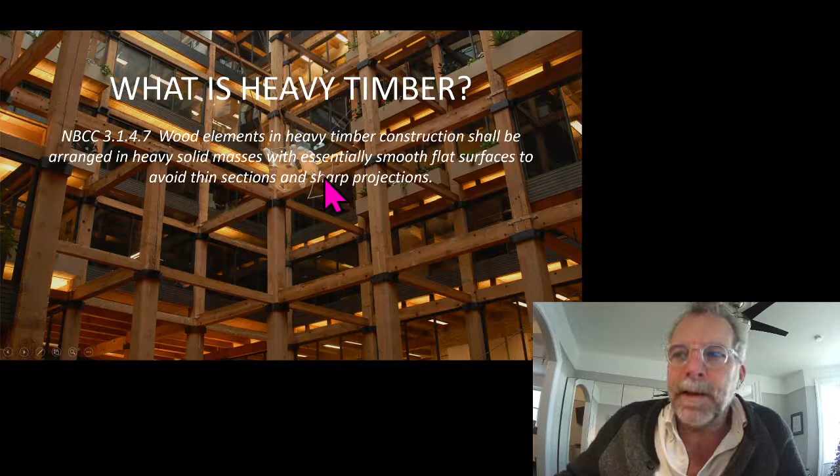This is the characteristic of heavy timber that makes it more fire safe, and we'll talk about fire safety a little bit more later. The explicit definition: columns have to be a minimum of 140 millimeters, beams a minimum of 89 millimeters, floor decks minimum 64, roof decks 38. If you meet these minimum dimensional requirements, you're deemed to have a 45-minute fire rating by default.

So, as you know, what that means is that the building will maintain its structural integrity for 45 minutes after the onset of a fire, which allows the occupants a chance to exit the building.

So what is mass timber then? Well, mass timber has no definition in the National Building Code. It is essentially a building system comprising larger engineered elements manufactured by assembling smaller pieces of sawn or peeled wood using adhesives or mechanical fasteners.

Fire resistance of mass timber elements is calculated in accordance with NBCC Appendix D. Essentially what that does is allow you to calculate the burn rate of the wood, estimate the remaining core after your fire duration, and evaluate the structural capacity at the end of your design fire.

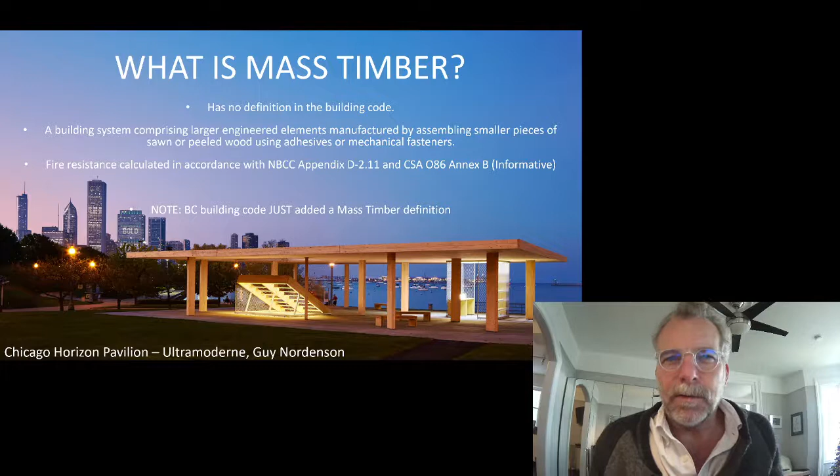BC Building Code did just add a mass timber definition. The mass timber definition is essentially the same as the heavy timber definition, except that the sizes are rounded to suit dimensions of standard glulam, CLT, and NLT panels. But otherwise, it's a very similar definition to heavy timber.

So let's look at some of the drawbacks of using wood, or some of the perceived drawbacks. Fire is the number one. People perceive that because wood is combustible, it's therefore not fire safe, and it's simply an erroneous presumption. Anybody who's tried to build a campfire, or even a fire in a fireplace, knows that fire will not sustain combustion in the absence of a re-radiating surface.

That's a wonderful quote by my pal Steve Craft from CHM Fire. Essentially what that means is if you have a log on its own, you cannot light that thing on fire. The only way you can get it to catch is to put two logs side by side so there's a gap, it'll catch fire in the gap, or put it adjacent to the back of your fireplace, it'll catch fire in a gap, something. But it needs a re-radiating surface to sustain combustion.

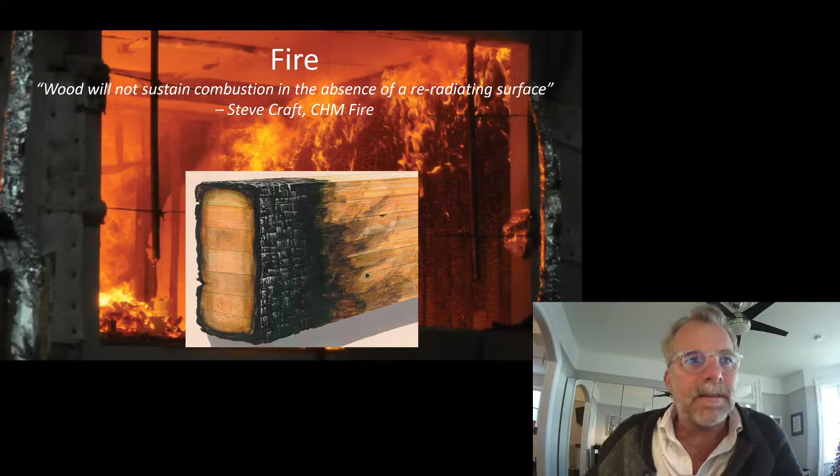And this is a wonderful picture - this is from, I think, the Great San Francisco Fire at the turn of the 20th century, post-earthquake. What we can see is that the steel elements have failed.

They turn to spaghetti in the presence of heat, with a dramatic loss of strength and stiffness. The wood element certainly charred, but that solid core was left in the middle, so the wood element stayed intact and is supporting the failed steel elements.

All of the loss of life was related to fire code violations. There was a fire escape on the side of the building that collapsed, and there were doors that were barred to prevent people from leaving and taking breaks. But the structure did exactly what the structure was supposed to do.

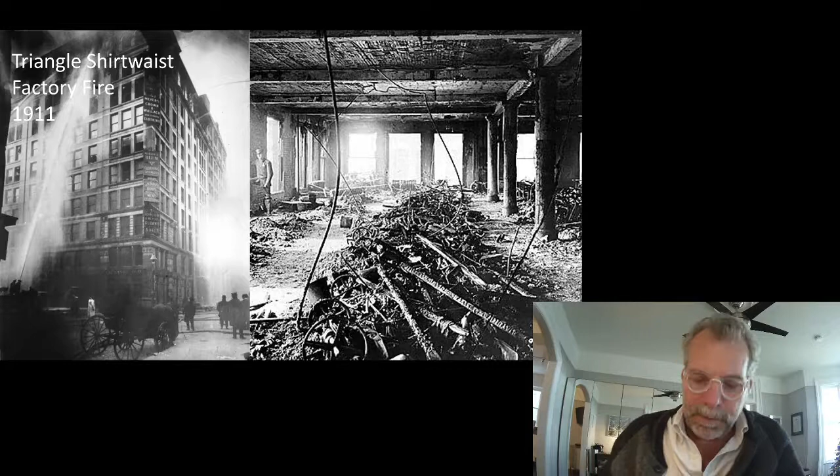So here's a mass timber building that is completely intact following the fire. We know that mass timber and heavy timber are fire safe.

So why does wood have a bad rep? Light wood framing is not fire safe. With light wood framing you have thin elements relatively closely spaced, creating re-radiating cavities between joists and within stud walls - really the worst possible situation for fire. That's why light wood framing is suitable for single family homes, because you're never far from an exit in most single family homes.

For multi-story buildings up to six stories, the fire protection requirements are stringent - mandatory sprinklers, multiple layers of drywall to provide insulation to the wood. So light wood frame needs to be fire protected, but mass timber doesn't necessarily.

Another major concern people have about building with wood is water. To be sure, wood is vulnerable to decay in the presence of water, but it's not vulnerable to decay if it's taken care of properly.

So decay requires liquid water. This graph shows that fungal growth happens when the moisture content of the wood exceeds about 25%.

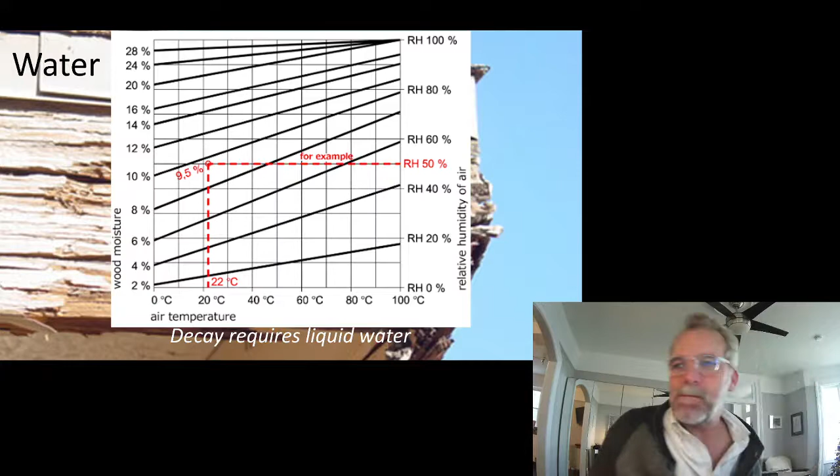What about cost? Anecdotally, wood structures are generally considered to be about 15% more expensive than the comparable steel or concrete structure. But of course there is a gigantic range. Many of the precedent projects we're going to see, the wood structure is twice as much as the comparable steel or concrete structure, simply because the choice of using wood was made for aesthetic reasons, and the wood structures were designed explicitly to be expressed, compared to a kind of meat and potato steel or concrete structure.

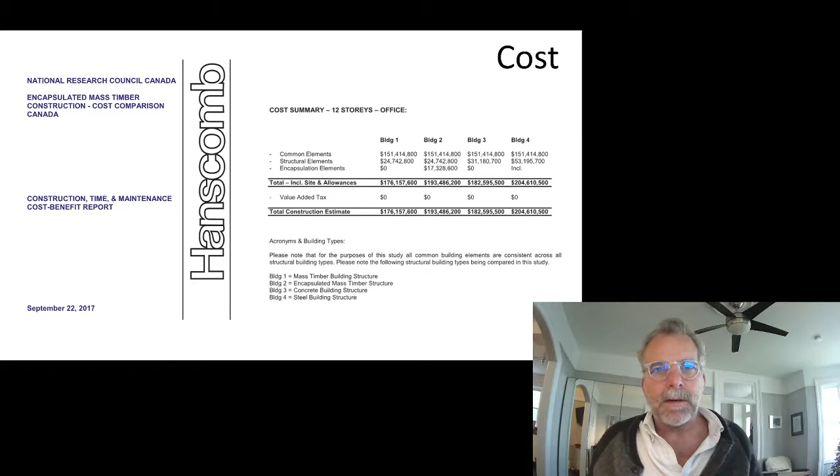If we look at this NRC report, commissioned by the National Research Council, we see a different story. This was a 12-story office building. It was designed in 4 different ways: as mass timber, encapsulated mass timber, which means covered in drywall for fire protection, concrete, and steel. What we can see is that the mass timber structure is actually the least expensive of the 4 alternatives, because the mass timber structure in this study was optimized.

Now, the mass timber structure in this study probably had a 6 meter by 6 meter span, for example, because that's optimal for mass timber. It's not optimal for a 12-story office building. So it can be very economical if it's used in its optimal way. Anecdotally, as I say, generally it's considered to be about 15% more expensive than concrete or steel buildings. That is 15% more expensive on 20% of the building, so about a 3% premium on the building cost.

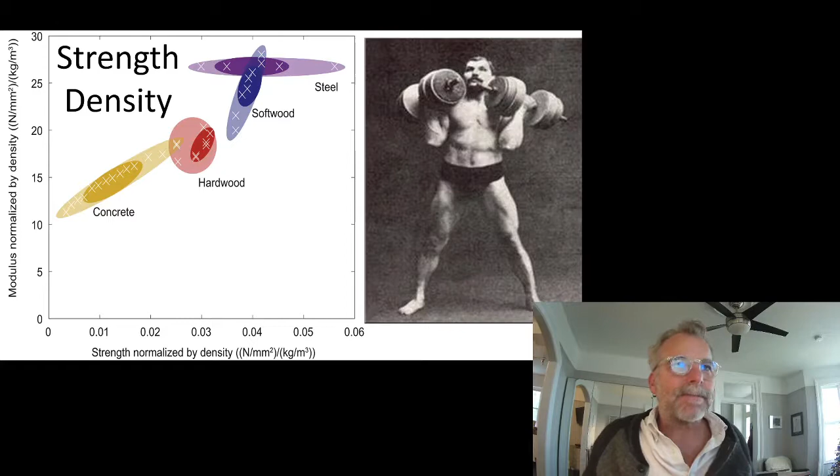So let's think about building codes. The building code currently allows light wood frame buildings up to 6 stories, which was a big change in the 2015 building code. So 6 stories is a limit, and it makes no exceptions for mass timber.

And yet we've got projects like this underway. 77 Wade, a 100,000 square foot, 8-story office building, has approvals in place. U of T Tower is a 14-story office building, which has just received the planning approval. We don't have a building permit, but we have approval.

So to move to the next stage, the way these buildings get their approval is through an alternative solution. The building code has prescriptive measures that say you can build this type of building this big, but there's a provision for alternative solutions that says if you can demonstrate that you meet all the intent of the prescriptive measures, you are not bound by them. These projects have gone through an alternative solution process to demonstrate that they are at least equal to the building that would have been prescriptively allowed, primarily in terms of fire safety, but also durability and structure. So we're not really limited by the building code. It provides limits, but it also provides an out.

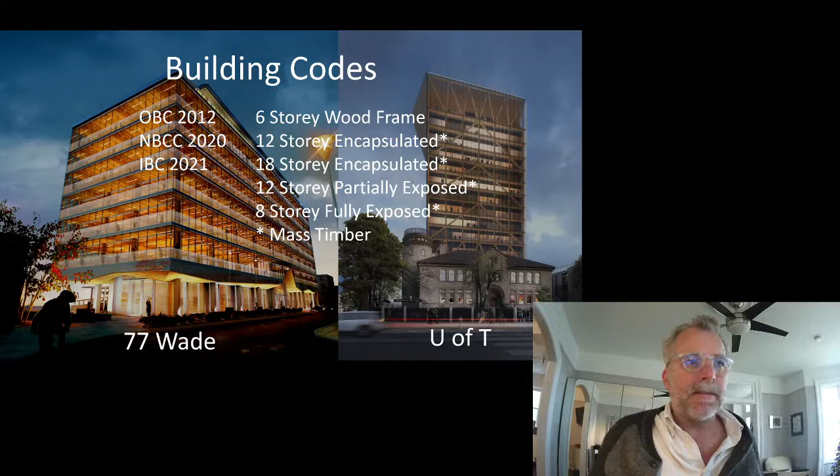So, are there any benefits? We know the perceived drawbacks of building with wood are generally not that valid, but are there benefits to building with wood? The major benefit to building with wood, of course, is sustainability.

Whereas building with concrete and steel results in a great deal of new CO2 in the atmosphere, building with wood actually encapsulates CO2. It's carbon negative for the structure.

The approximate rule of thumb is that 1 cubic meter of mass timber or wood used in construction encapsulates as much carbon as is contained in 1 ton of CO2. This was always a very confusing statistic for me, because 1 cubic meter of wood doesn't weigh 1 ton, so how can it encapsulate 1 ton of carbon?

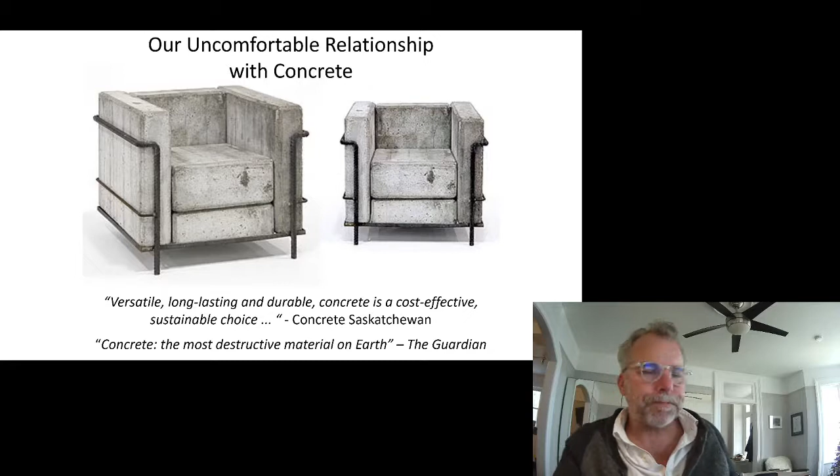Modest amounts of concrete are not going to hurt anybody in construction. The trouble with concrete is that it is the best construction material. It's fire safe. It's massive. It's rigid, so we don't have vibration problems. It provides a good acoustic barrier. It's very flexible and versatile, and for all those reasons, it is utterly ubiquitous.

And we build so much in concrete, and that's really the problem. It's not that there is anything explicitly wrong with concrete. It's just that when you're building so much concrete continuously, it becomes a problem. So what are the problems with concrete? Well, one is obviously CO2. The concrete industry is responsible for something like 8% of total global CO2 emissions worldwide, so it's just a gigantic contributor to greenhouse gases.

The production of cement is an extremely energy intensive process. Backing up a little bit, concrete consists of gravel, sand, water, and cement. The cement is the binder, so it's a critical part of the concrete—you can't have concrete without cement. Cement is extremely energy intensive to produce; it requires an awful lot of heat, and that's what makes concrete such a terrible contributor to greenhouse gases.

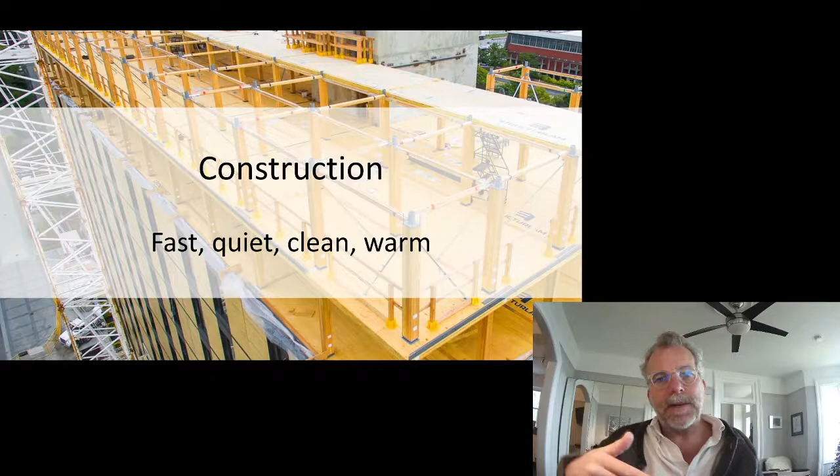I was just listening to something utterly counterintuitive: in the desert, outside shaded areas, the ground temperature is colder than the air temperature overnight. That's because, in addition to being cooled by the air, the ground is radiating heat which is lost into space. Under a tree, it's equal to the air temperature because the heat is being re-radiated back.

Wood structures are associated with wellness. There have been studies demonstrating that in wood buildings there's increased productivity, reduced absenteeism, and happier people. To be sure, these studies may have had an agenda, and it's unlikely the findings were actually false, but someone found what they went looking for. Still, they're not incorrect.

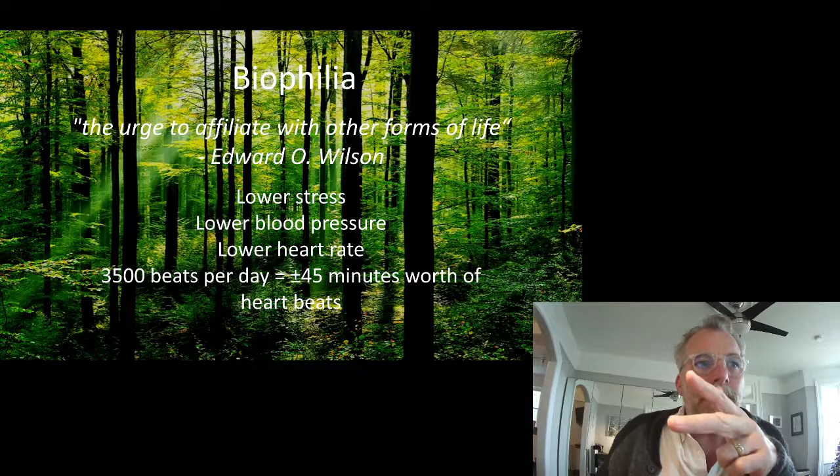Biophilia is the urge to affiliate with other forms of life, and this is the effect we're seeing in people working in wood buildings. Studies have shown lower stress, lower blood pressure, lower heart rate. People in wood buildings have been found to have their heart beat 3,500 fewer times per day—45 minutes worth of heartbeats saved working in a wood building. The presence of wood suppresses the sympathetic nervous system, the fight-or-flight system, and reduces cortisol levels in the blood. So generally, people prefer being in wood buildings.

Wood is a hygric mass—hygric being the ability to absorb and re-radiate water. We can call this the humidity flywheel effect: wood absorbs and releases moisture to maintain the indoor environment within an optimal range when exposed on the inside. This is one reason wood is so good in a wet environment. Say you get some condensation in the ceiling of your pool—wood has the ability for local moisture to absorb that moisture and distribute it within the wood through the capillary cells, so the moisture content stays below 25%, except very locally, even in the presence of some liquid water. Wood is effective at helping maintain the indoor environment through this humidity flywheel effect.

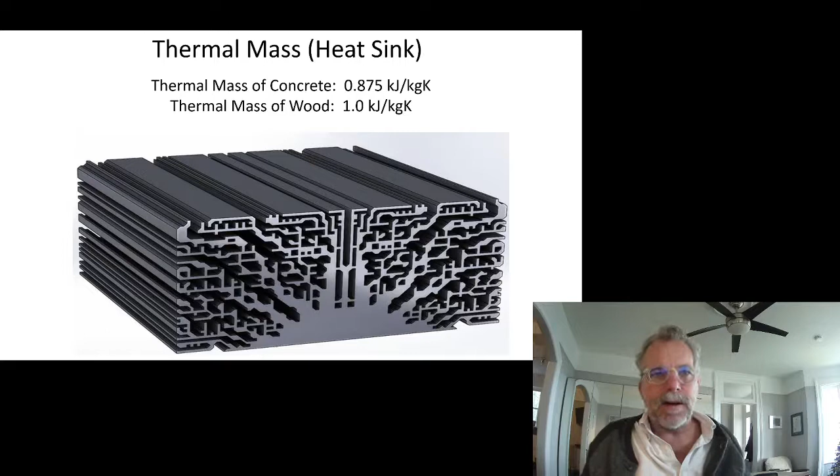The second reason is that wood is much less conductive, meaning the stored thermal energy isn't accessible as quickly. If a concrete floor cools overnight, the next day the floor cools the environment, or conversely, if it warms up in the sun during the day, you have access to that heat that night as the concrete re-radiates it. Wood, being less thermally conductive, doesn't give you access to heat in the same way, but for a long-term flattening of the temperature curve, wood is effective. In mass timber, notwithstanding that it's much lighter than concrete, there is quite a bit of thermal mass—a 10-inch mass timber panel would have the thermal mass of a 3-inch concrete topping, so not insignificant.

What about money? Commercial landlords have recorded higher rents, better tenants, and shorter vacancy periods in their wood buildings.

What constraints do we have to keep in mind? Well, vibration and acoustics. Steve Titus gave me this quote: wood benefits from the effects of psychoacoustic perception, meaning that because we associate wood with a warm environment, we assume it will acoustically perform well. It doesn't. Wood is actually slightly more reflective than concrete. Here's our noise reduction coefficient for wood, and here's the noise reduction coefficient for unpainted concrete. So wood is not acoustically absorptive.

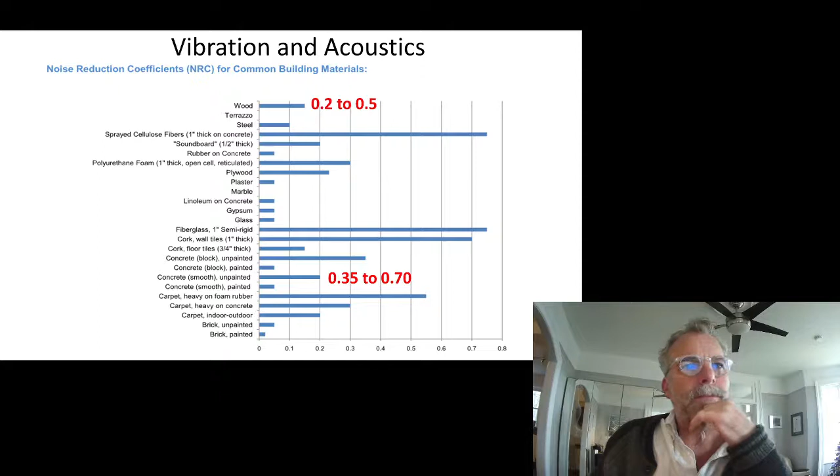It is reflective, and in fact, one of the major barriers to exposing wood in mass timber buildings is exactly that. We need absorptive surfaces, so we wind up covering a lot of the wood with acoustically absorbent panels. We can mitigate the sound reflection, but we do it by adding something - we can add something made of wood to be in kind with the structure, but we are covering up the structure with a mitigating panel.

Sound transmission is a function of weight, and one of the great benefits of building with wood is that it's lightweight. One of the great drawbacks is also that it's lightweight. Because it's lightweight, it doesn't mitigate sound transmission in the same way, and when it doesn't do it adequately, we generally pour concrete toppings on top of wood floors simply to add mass to manage sound transmission.

Shrinkage is a problem with wood. Wood is a natural material, and trees require water to grow - they are full of water. When they're harvested, they first dry and lose 50% of their mass, which is just loose water within the wood, and then they'll further lose 25% of their mass, which is water stored in the cell walls. That's the process of curing. When we lose the mass and lose the water, we shrink.

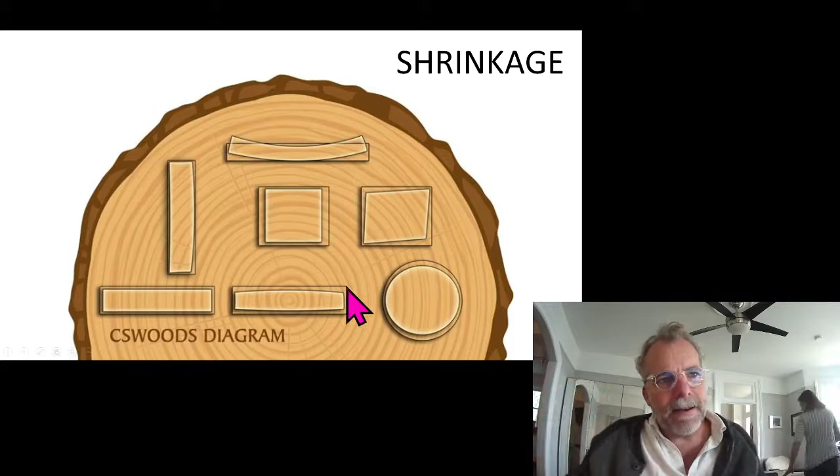It causes it to cup. On this surface, the grain was more dominated by the annular orientation relative to this surface, which is more dominated by the radial, and therefore it cups. So we get cupping and twisting and this kind of bulging effect, just depending on where we cut the piece of wood from the tree.

The amount that wood shrinks is a building movement. All buildings move, and the shrinkage in wood is comparable to other kinds of building movements. To put it in perspective, concrete, when it shrinks due to curing, also shrinks about 0.1% - similar to the amount wood shrinks parallel to grain. That's why we wind up with cracks in our concrete.

A steel beam, midspan, spanning L over 360, will deflect around 20 millimeters - that's the equivalent of shrinkage over 3 floors of a wood building or so. So we're used to dealing with movements of that magnitude, and the solutions are similar: providing slip joints, expansion joints, and other types of things.

Another consideration with wood framing, mass timber framing, is beam shadows. In a concrete building - the kind of prototypical concrete building we're seeing in Toronto these days - you have a raised floor, services under the floor, exposed concrete ceiling, flat slab with drop panels. The innovative slab developed by Dermot Sweeny has tapered drop panels, and all of these things allow maximum light penetration - there aren't a lot of features on the underside of the ceiling to impede the penetration of light.

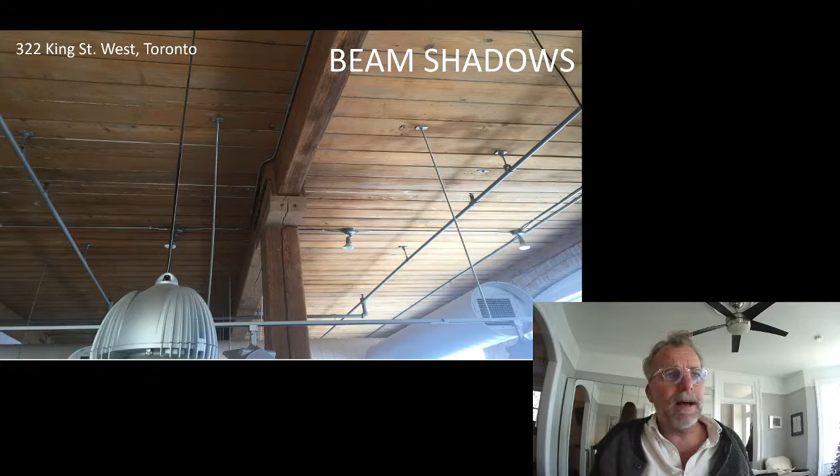As soon as we start building with beams, we start introducing beam shadows. This image is from KPMB's old offices on King Street - we were involved in a competition with them for a mass timber building, talking about structural systems, and we just looked up and saw dramatically less light on the second bay than the first bay, getting darker the farther you get from the window. We've got to be sensitive to beam shadows in wood buildings in a way that we don't in concrete buildings, because they're flat slabs, and in steel buildings, because we have ceilings - we don't expose steel in multi-story buildings since it needs fire protection.

And this, of course, is what we would all like to see. This is the Villa Mairea by Alvar Aalto. Incredibly, this is not a mass timber ceiling - it's just a wood ceiling. But without the beams, the light penetration is amazing.

So, we're hearing a lot about it these days. Is it new? Well, of course it's not. We've been building with mass timber or heavy timber for centuries.

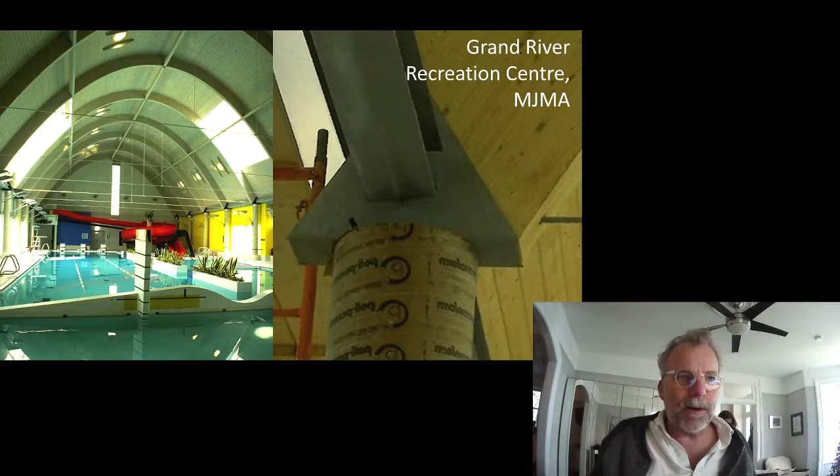This is the Google offices in Waterloo by Robertson Simmons Architects, repurposing an existing heavy timber building. Blackwell's been doing it for a long time. The Grand River Recreation Center by MacLennan Jaunkalns Miller, it was just McLennan Architects at the time, would have been the late 80s, with glue lam arch and heavy timber deck.

Milton Leisure Center is another example from the early 90s, again McLennan Architects, which was glue lam beams and purlins and a heavy timber deck.

Jackson Triggs Winery by KPMB. This was another late 90s project that I think stands up today. If this would be celebrated today, 20 years later, as an architectural achievement.

Cawthra Community Center, Diamond Schmitt. This was another one of our projects.

Bird Studies Canada headquarters, I love this project. I don't have nearly enough photos of it, and I've got to do something about that, to the point where you can see that this photo was scanned out of a physical magazine. I love this because this was done by Montgomery Sisam in early 2000 or maybe the late 90s. But it's an archetypal building now, a steel frame with heavy timber deck.

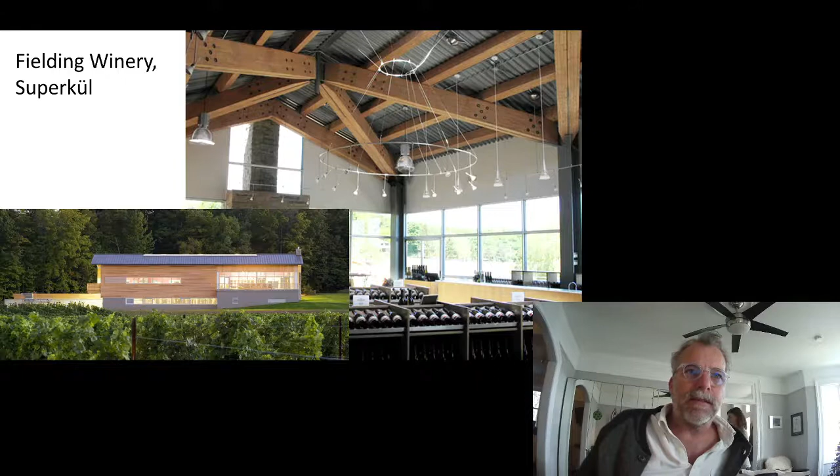Another nice little interesting radial project with Phil Carter. In Lakefield College School, Diamond Schmitt.

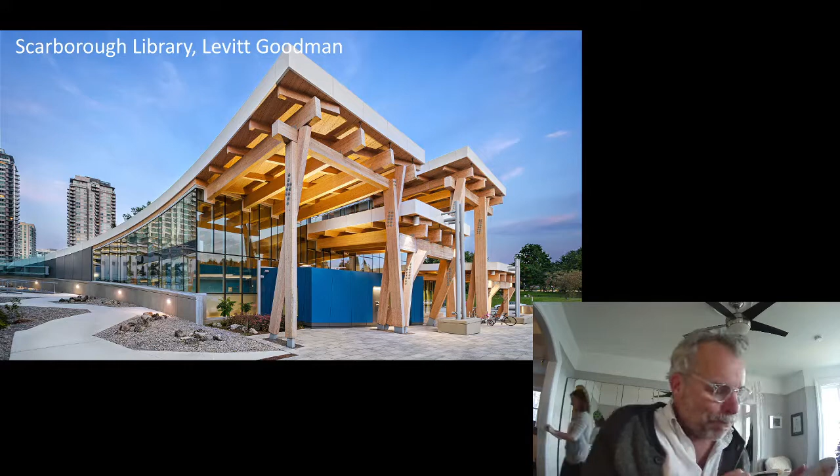And then for the volume of fiber award, we go to the Scarborough Library. How much wood could we squeeze into one project? Extraordinary project - a lot of wood.

CFB Borden dining facility. This is worth talking about because it really gives you a sense of the range of form that's possible in wood.

In steel, it's difficult to build an arch - you've got to curve big steel members, it takes extremely heavy equipment, or you've got to cut things out of plate. It's a real challenge. In concrete, building complicated forms is expensive. In wood, you don't get a curved glue lam for free, but generally it's about the same process as making a straight glue lam beam. So it's not a gigantic burden to make a curved glue lam.

A lovely little project with C.Y. Lee. The really interesting thing about this one is the pre-stressed tensile roof and the fact that it was taken out of a single plane and made into a space-occupying truss over multiple bays.

And then my partner Christian really took it to another level of refinement with the Redstone Winery. This is CLT panels with a king post.

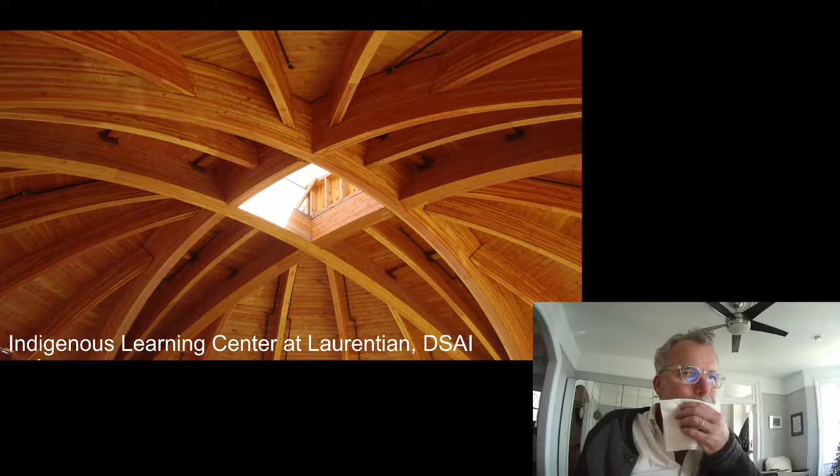My partner Ian, Indigenous Learning Center at Laurentian University, with Diamond Schmitt Architects. And my partner in Corey's project, the Iroquois Longhouse with Brook McIlroy.

And another one of Christian's projects is the Ontario Place Waterfront Park. In this case, we can see the CLT panels used almost vertical like beams, as well as acting as a deck.

One of our first multi-story buildings is St. Jacob's Farmers Market in Waterloo. So multi-story, glue lam, CLT floors.

And this is one of my favorites - the Nike Crystal Coliseum. This was a building built only for a weekend, I think, during the Toronto Marathon, several years ago. It's a floating building on a barge - glue lam structure with fabric roof. We designed the glue lam and the fabric. It was so effective because the fabric is translucent, so it acted as a beacon at night with the lights glowing through, but also reduced the daylighting requirements. This was possible because there needn't be an envelope - it was a temporary building, so it didn't need any insulation at all.

A wonderful thing about this as a system is that if water gets through that membrane, you see it, and it dries up. It's not like so many of the wood systems - if you have a multi-layer assembly, water gets in there, you don't even know you have a leak, and that's the thing that accelerates the deterioration of a building. But if you just have a single layer, water comes through and drips on the floor - you put a bucket under it, and then you go fix it.

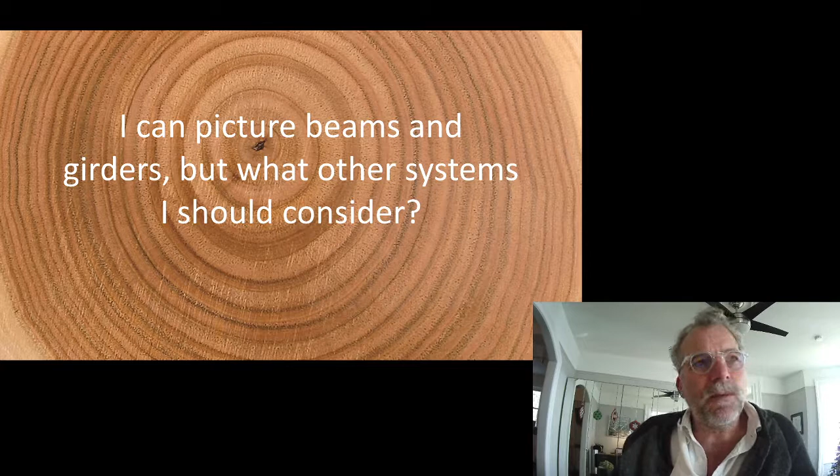So what other things can we do? We've got beams and girders as the obvious thing. Let's look at some of the systems.

These images I developed for an article that I wrote for Canadian Architect earlier this year called the Mass Timber Primer, and these images have been popping up everywhere - the number of ways to build.

This is kind of the simplest default: long beam, short deck. So if you have an asymmetric bay, orient your beam in the long direction, your deck in the short direction. This is not what we would do if we were designing Walmart, for example. In a Walmart, we would orient the heavily loaded elements in the short direction and the lightly loaded elements in the long direction - naturally, if you don't have as much load, it's easier to span farther.

But as I mentioned, in wood the cost of the fiber dominates the cost of the system, and the deck is the bulk of the fiber, so we want to minimize the deck span. Gary Williams, who owns Timber System, once told me that the system with the most economical deck is the most economical system. So we orient the beam in the long direction because the beam has depth and can be efficient, and we orient the deck in the short direction because that minimizes the amount of fiber in the system.

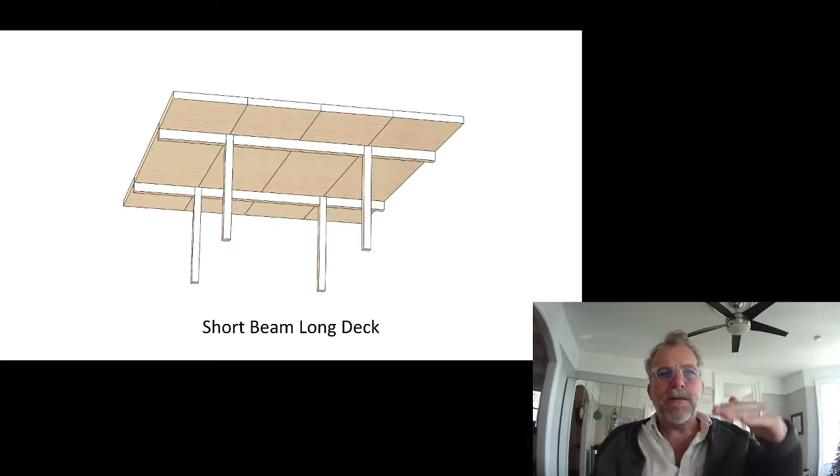Alternative: short beam, long deck—just the opposite of what I was saying. Why would we ever do this, having just told you the other is best? We'd do this if depth of floor was important to us. We'd have a thicker deck, maybe 50 millimeters thicker, but we might save 200 millimeters in the depth of our beam. In commercial development, especially in an urban context, floor-to-floor heights are critical, and squeezing a few inches out of the floor-to-floor height is important.

So we might orient the deck in the long direction.

Beams and girders: if the system with the thinnest deck is the most economical, we want to choose the thinnest deck that meets our basic criteria, probably based on fire rating, and span it as far as we can. As soon as we hit the span limit, we put a beam, and another, and another. We don't want columns at that short spacing, so we end up introducing girders. In this example, the deck is as thin as it can be, on beams spaced just close enough to accommodate its maximum span, and a girder negotiates between the beam spacing and the column spacing.

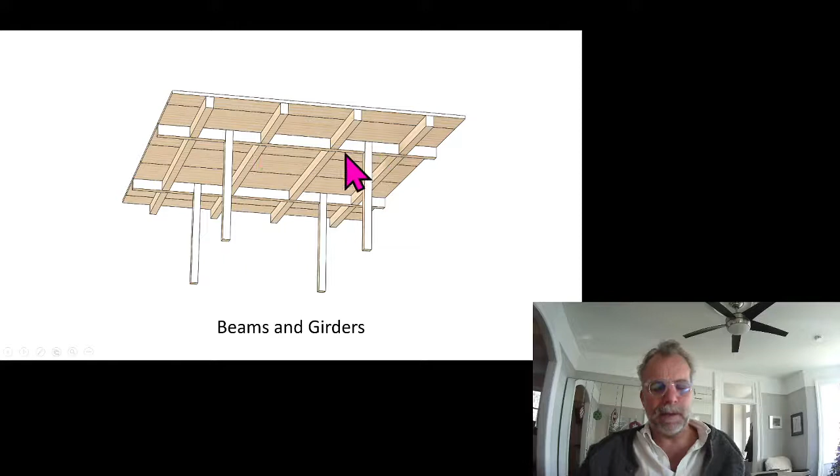A two-way beam system. One thing you might have noticed in the previous system—the beam and girder system—is that there's a hierarchy: deck, beam, girder, which imposes an orientation on the space. There's a hierarchy of views and circulation, and it impacts mechanical distribution, all of which may be fine, or may not. It's also optimal for asymmetric bays—we'd naturally want one bay shorter than the other. Most wood systems are optimal with an asymmetric bay, something like 1 to 1.5.

So what if we want our space to be more democratic than that? We don't want to introduce a hierarchy, and we want column spacing the same in both directions—not a 5x7 grid, but a 6x6 grid. Well, one choice we have is to do a two-way beam system.

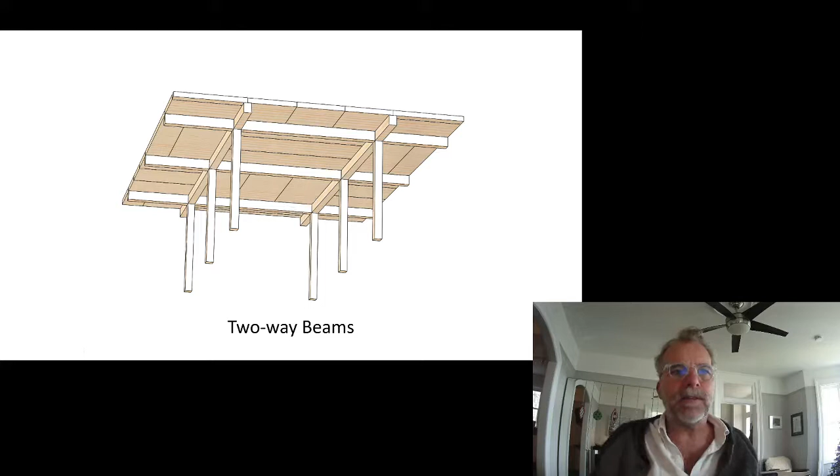In order to benefit from two-way beams, we need to load beams in both directions. So we might flip the deck and orient it in different directions, in a parquet flooring or basket weave style. What that does is give this beam exactly the same amount of load as that beam, so all our beams are the same size.

Another example is a two-way point-supported CLT system—the scheme used for Brock Commons, the 18-story student residence at UBC. Tremendously innovative: you can see there are no beams. Having a system with no beams is hugely beneficial from a floor-to-floor height point of view, a mechanical distribution point of view, and a penetration of natural light point of view. So huge benefits to point-supported CLT.

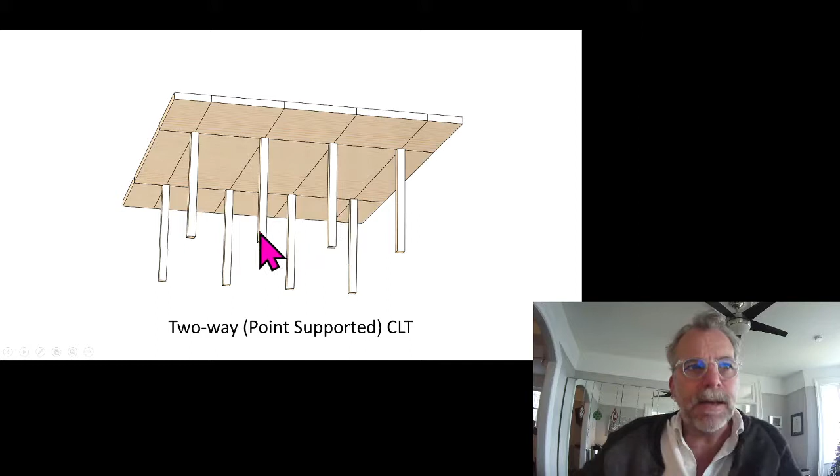However, CLT is only made in 2.4 to 3 meter widths, and if your panel is limited to that, it becomes the spacing of your column. So you get very, very tight column spacing in point-supported CLT buildings, which lends itself well to projects like student residences or hotels, where you've got closely spaced demising walls anyway—but it's not an appropriate system for an open concept commercial office building.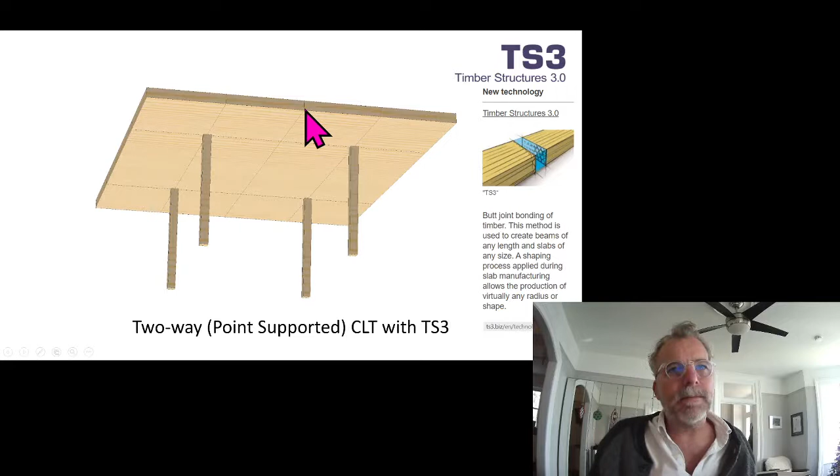I'm going to be preparing a lecture shortly on shallow floor systems, simply because for commercial development it's so important.

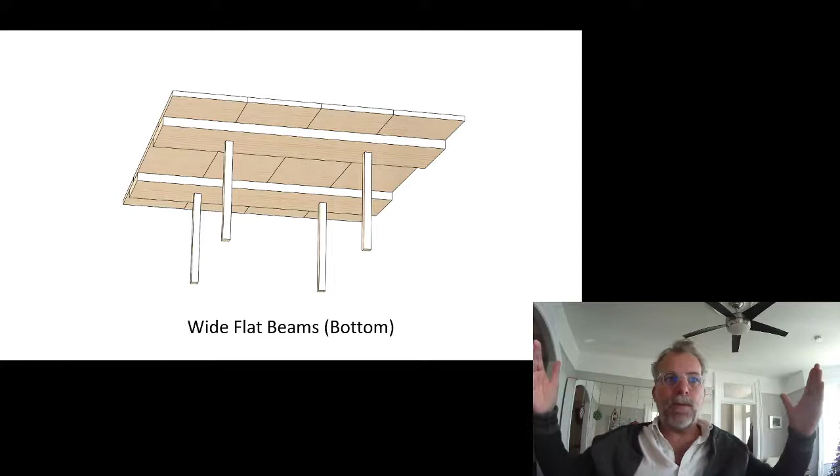This would be one of the shallow floor systems I talk about, wide flat beams. We know that deeper is cheaper is the adage in structures. An efficient beam in bending is narrow and deep. The reason we'd do a wide flat beam is simply to make it shallower. If we make it shallower, we have to make it wider. Using CLT, we can make very wide beams, so we can use wide flat beams to develop a shallow system.

Look at the way it's detailed up here. We can see that the panel goes all the way to the midspan of the beam. If you have a beam that is as wide as a third of your column to column span, that doesn't mean your deck can be shorter, because if you start loading the edge of your beam, it's like a teeter-totter. So the deck needs to come over and bear its load right along the center line of that beam, so that the beam doesn't topple.

So you don't save anything in deck with a wide flat beam, but it does make the beam shallower, and that's good. The other thing is it reduces the exposed surface.

In a wide flat beam, you expose the bottom and the two sides to fire, whereas a deep beam, you expose the two vertical sides and the bottom. The deep beam will be much more affected by fire than the shallow beam. So what we want to do is minimize the amount of surface, and a wide flat beam will do that. Our fire load case is likely to be better in a wide flat beam situation.

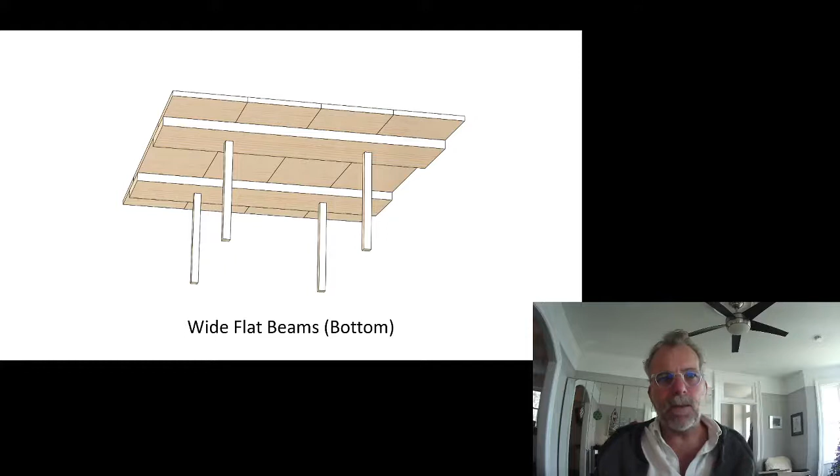Another one that we have not done, but we were advocating for a project, and we will do it eventually, is wide flat beams on top. The deck is unaffected - it has to span to the middle of the beam regardless, one way or the other. But if we put the wide flat beam on top, it means we have a featureless soffit, and that's beneficial for the reasons I was talking about before - for mechanical distribution, for space planning, for light penetration. There's a number of reasons why that's better. It does mean you have to build up your floor, but in a lot of projects you would build up your floor anyway.

So what about wide flat beams flush? Well, I already told you that if you load the edge of your beam, then your beam is vulnerable to toppling. So if you want to do wide flat beams flush, what you need to do is use a wide column. Your column has to be nearly as wide as the beam itself, so that when the deck loads the edge of the beam, it doesn't make the beam simply topple over. That's not to say that it's not a good system.

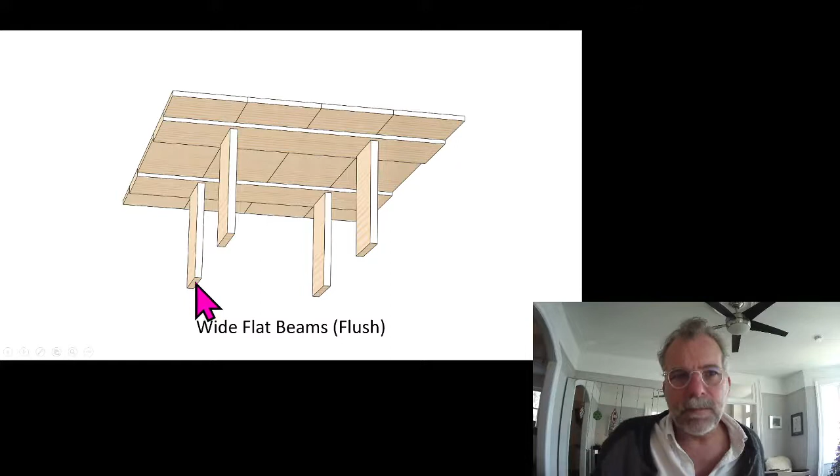A similar system is what's being done for George Brown College, the Arbor, with our good pals Fast and Epp from Vancouver. Very, very clever structure. But these long columns - they had to make a concession to the columns in order to get it to work.

There are a number of double beam systems around. Double beam systems are really interesting for a number of reasons. One is that in glulam, you're limited to about 365 millimeters in width, so you're going to run out of size if you start getting into large beams - you just run out of available size. And so having two beams, you get twice the width, obviously.

The double beam allows the column to go up between them. So why is that important? Well, I told you that wood shrinks about 2% perpendicular to grain and 0.1% parallel to grain. If we have a 600 millimeter deep beam, that beam is going to shrink 12 millimeters as it seasons.

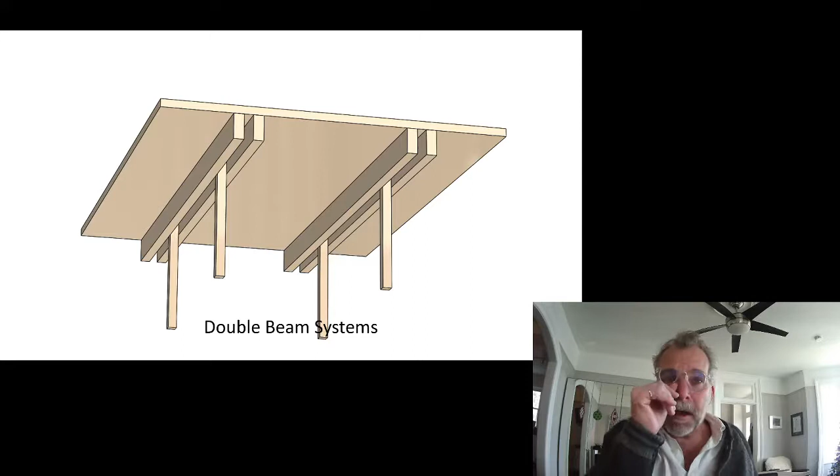Now, all of these things - if you buy glulam that's already seasoned, then most of that shrinkage has already happened, so maybe it's 6 millimeters instead of 12 millimeters. But regardless, the shrinkage is significant. If the column goes in between and supports the column above, now the floor-to-floor shrinkage is only the shrinkage parallel to the grain of that column. If you stack it or platform frame it, then the floor-to-floor shrinkage is the shrinkage of the beam plus the shrinkage of the column, and that adds up over multiple stories of building. So there's a real benefit to having the column sneak up between and having a beam held off on either side with a hanger.

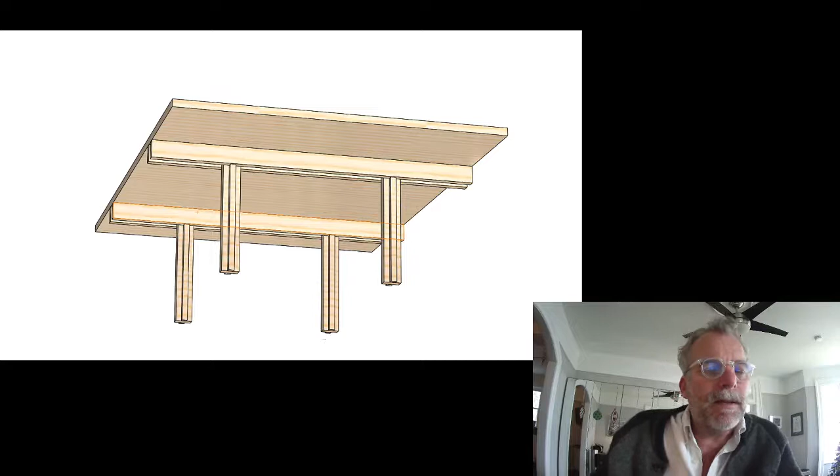This is a really interesting concept for the Trinity residence which we're working on right now with Mecanoo. This is cruciform columns with a double beam. The cruciform is seen by some people as frivolous and is probably being value engineered out. But the cruciform is essentially just a shoulder for the beam to sit on, to transfer load into the central beam or central column, and you can see the central one slips up in between. So it's a really clever way of building these columns, and I think it was probably short-sighted to think they could be value engineered out. I don't know that it's actually going to be a value add to take out the cruciform. I think they were really super clever.

Triple beam system. This was developed by my colleague Simon Raymond in my office for a project. It has a number of really interesting enhancements. In the triple beam system, the outer beams can run continuous past the column. The column is notched and runs up through in between the outer beams, and the inner beam is discontinuous at each column because the column has to slip up through to manage the shrinkage.

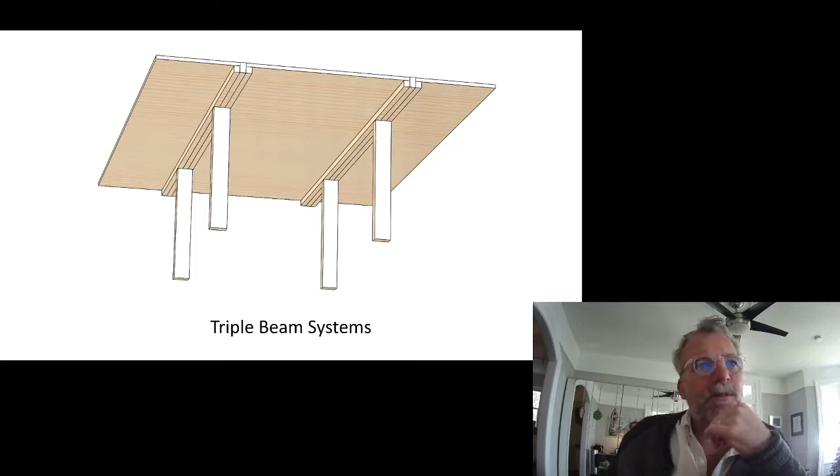The other advantage of this over a two-beam system is that we don't have a surface in between, so we've reduced the amount of unprotected surface from fire, which allows us to make the beam smaller as well. In this particular case, what Simon did is he made the central beam deeper since the outer beams can carry the deck, so he took advantage of a little bit of extra depth as well.

Staggered deck system. This was developed by Equilibrium with Michael Green for one of Michael's projects, and it's a really clever way of achieving long spans with thin decks. So you're essentially making like corrugated cardboard or corrugated roofing out of wood. You get the flexural benefit of the full double depth, whereas the volume of timber is essentially the volume of the single.

VCTC, or voided concrete timber composite. We were trying to get out of the habit of referring to this as bubble lam, because bubble lam automatically has a connection to bubble deck, and yet the voids don't have to be. So VCTC is a timber panel with a thick composite deck on top, comparable in thickness to the timber panel. So one might have a 250 millimeter timber panel with a 250 millimeter deck and 200 millimeter voiding balls.

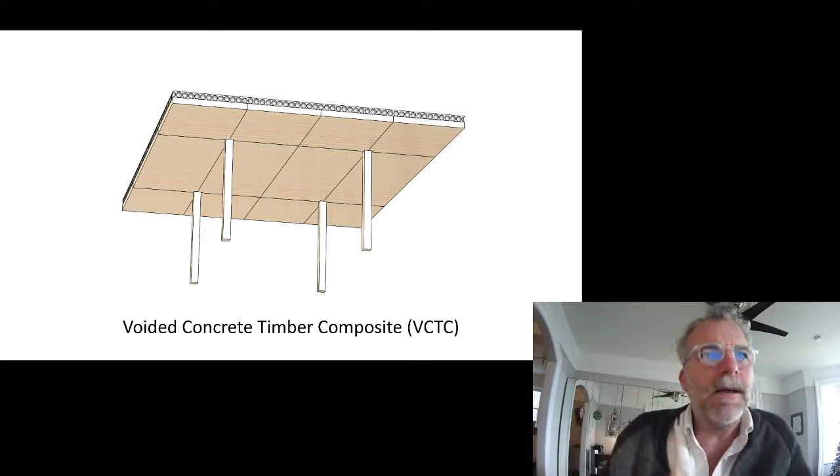The concrete allows the wood to span farther than the wood otherwise would have. The wood allows the concrete to span farther than it otherwise would have. So whether you look at it as an enhancement on a concrete system or an enhancement on a wood system, it doesn't matter. The two are better than either one of them from a span point of view.

From a loading point of view, we can tune the thickness of the topping to do whatever we need. In a traditional wood concrete composite, we would do thick wood, thin concrete topping would be optimal, and your capacity, your strength is limited by the strength of the wood. If we do something like this, we can say as soon as we hit 286 millimeters, we've run out of depth. We can't make a panel deeper than that reasonably, but we can have a 600 millimeter slab on top of that.

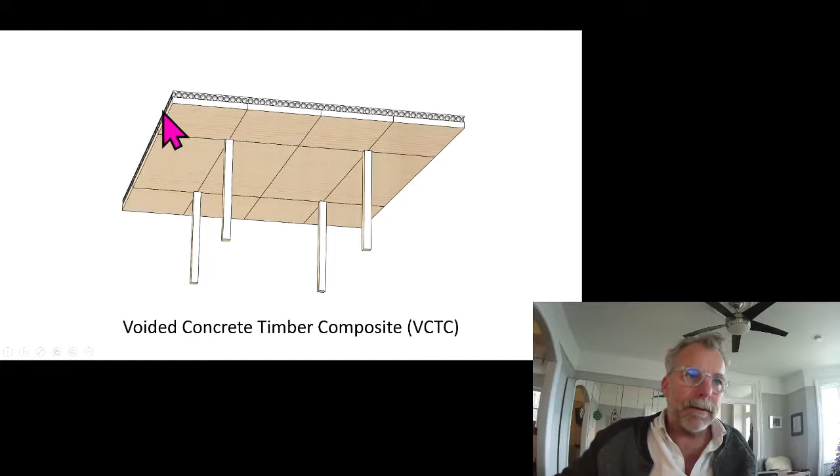What that does is allow us to do a featureless soffit. Now we've got a system that can approach the thickness of a concrete flat slab, so we can keep things much shallower. It minimizes the surface area—you can't get less surface area than a flat surface from a fire point of view, so it's very fire effective. We can achieve even greater fire effectiveness by putting extra bars in the slab, so in the event that the wood burns away completely, we maintain integrity in the concrete if need be.

The voiding balls are plastic balls, HDPE plastic, recycled plastic. They're there for two reasons. One is to displace concrete, because the less concrete, the less weight, the less cement, the less sand—so displacing concrete is a good thing. Also, it encapsulates problematic plastics into our building for a long duration, but that's just a secondary benefit. The system would work just as well without them—a thick topping on thick concrete would work perfectly well, it would just be 30% heavier, so why would you bother?

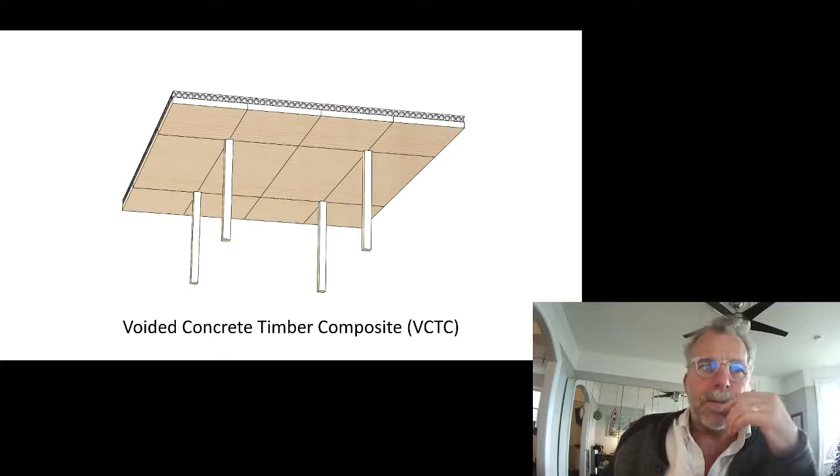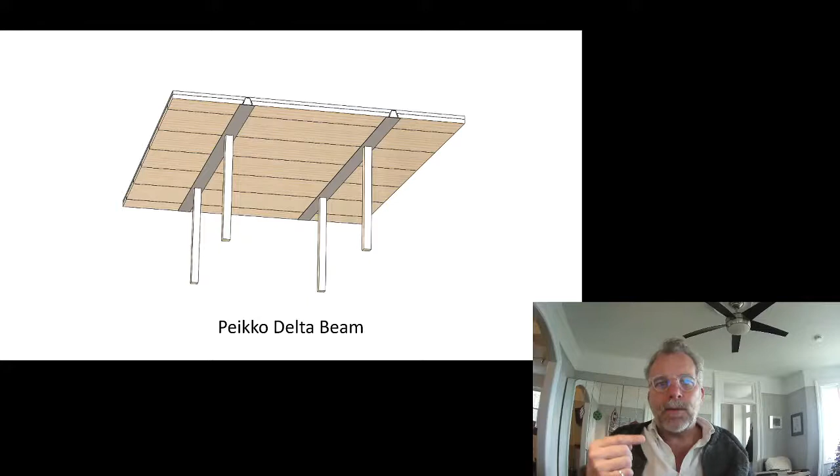The wood is made composite—we pour a concrete topping on top, which allows this to be a long span. The sides, the webs of the tube, are perforated with holes all the way along, which allows, when the concrete is placed, the hollow beam to fill with concrete. Inside the beam there's rebar, so the rebar contributes to the strength of the beam. The great benefit is that while the soffit, that bottom flange plate, is not protected from fire, it's fully effective in normal service loads. In the fire load case, we can neglect it because we have rebar inside the concrete, which has filled the beam. This is the system we're using for 77 Wade, and it's a tremendous system for long span shallow floors.

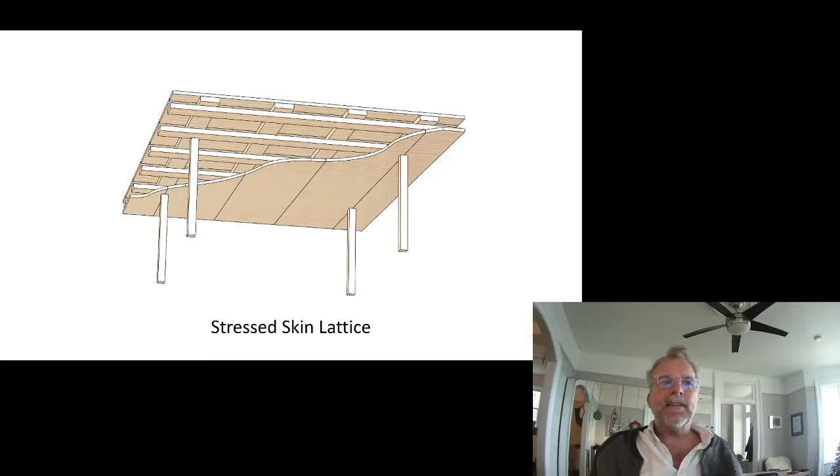This is a fanciful system that we developed. We were trying to think how do we span long ways, how do we have a long span two-way system all in mass timber. So we came up with this stressed skin lattice. We have mass timber panels on top and bottom, oriented in opposite directions, and in between we have wide flat glulam beams oriented in opposite directions. In one direction we have a composite system with a wide flat beam and a mass timber panel as chords, and the web—like a Vierendeel truss—is made up out of these perpendicular glulams. In the other direction it's the opposite, so both directions are equally effective and can achieve long spans in both directions with all mass timber.

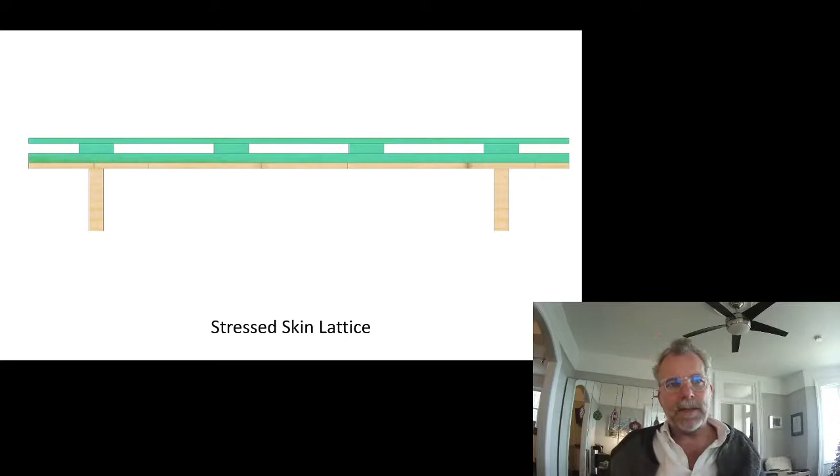Here's your cross section showing the Vierendeel truss. To remind you, a Vierendeel truss is a truss without diagonals, where the shear is transferred through a vertical element only, which is why the vertical elements in Vierendeel trusses are wide.

So people associate these with the vault. And to be sure, if you want a long span, the vault helps an awful lot. But there isn't a magic distinction. The reciprocal frame doesn't require the vault.

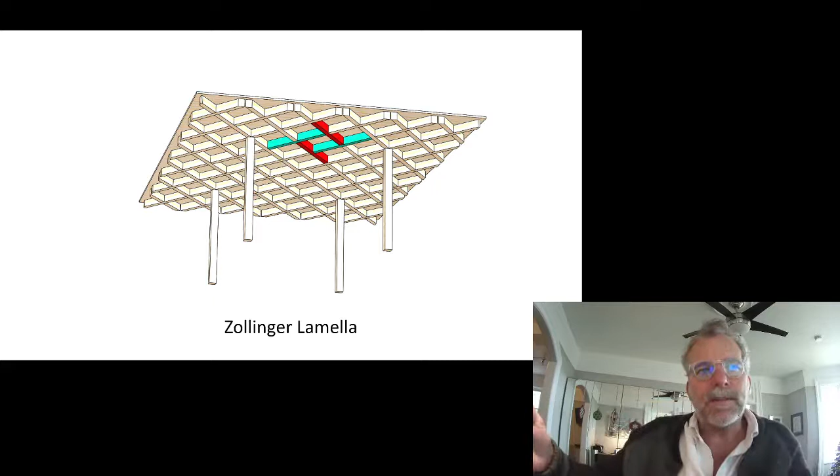This is a bending, stiff, two-way system made up out of short elements that are only transferring shear.

I thought, why can't we do that in wood? And we can, of course. It actually lends itself quite well. So we can use a combination of straight and curved glulam beams, because it's no problem curving a glulam beam. Even glulam curving in plan is possible.

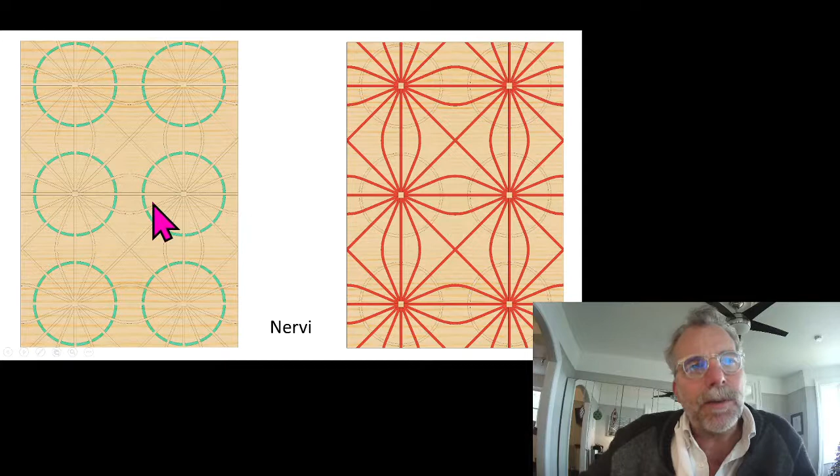And then we have ring beams here. The function of the ring beam is nothing more than keeping this curved beam from rotating. If you curve a beam in plan, it just wants to topple over. If you can prevent it from rotating, it actually contributes to supporting load.

The nice thing about this system is that it doesn't matter what kilogram of load you are. You get to a beam, you go straight to the column. There's no hierarchy. You don't get on a deck, go over to a beam, go over to a girder, go back to a column. Wherever you are, your load is going straight to a column. And so in that respect, it's very effective.

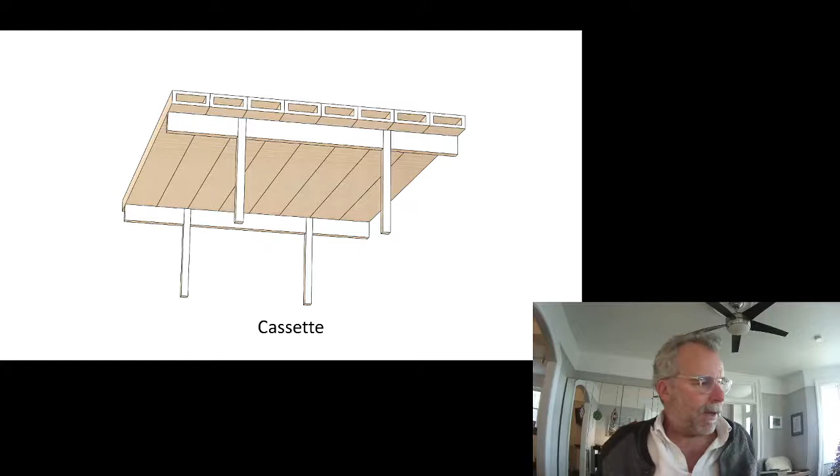This is a cassette floor system. Imagine we make a box, glulam side webs, CLT top and bottom chord. We make a box. We can span a cassette a very long direction, and this is what they've been developed for. The Lignature system from Europe is super clever.

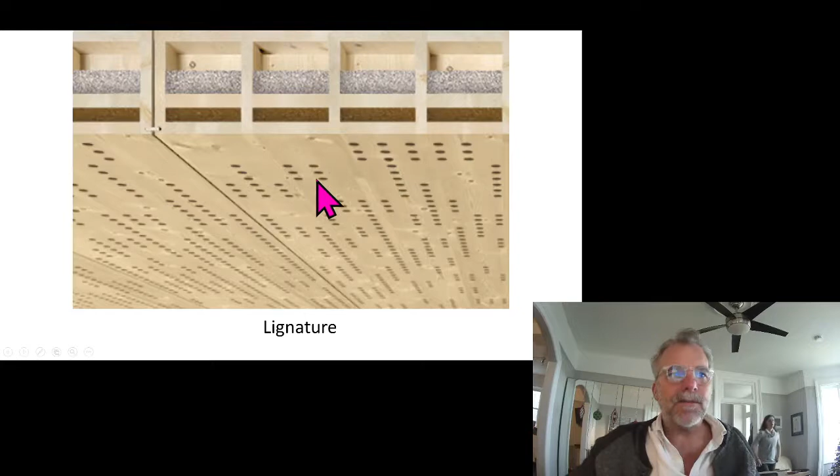It's taken the cassette one step farther and incorporated acoustic mitigation. So within the box, there is sand or lean concrete for mass, for acoustic sound transmission. There's also a second layer filled with Roxul insulation, or an acoustic insulation, and then the bottom surface is perforated. So what this does is give the mass timber panel great sound absorption qualities.

This is not a mass timber system, and nor is it prefabricated. I just love it, and if you can look it up and see some images - this is the Küng Holzbau system. It's essentially two-way layered 2x elements, light wood frame. It's all filled with sand in between. So you get tremendous two-way capacity out of the system throughout, but it does not lend itself to mass fabrication. It's probably very slow to build. God knows whether this will actually develop legs, but it's so cool that I wanted to share it.

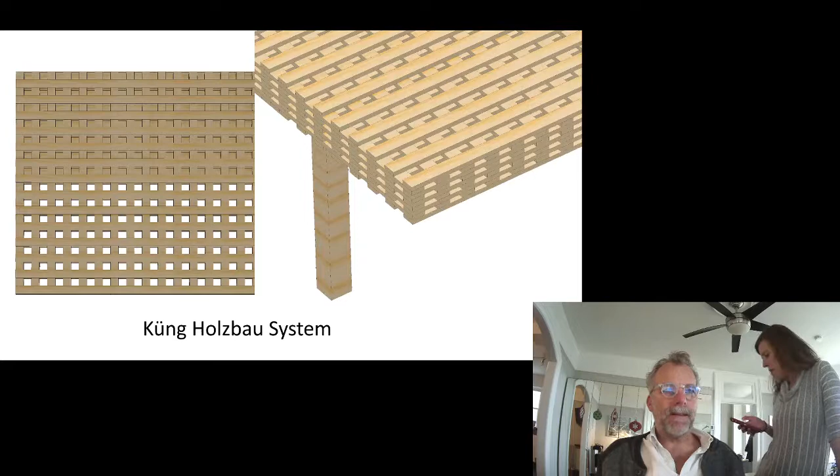One of the benefits of mass timber systems is... You have a meeting at 1, right? Yeah. What time is it? 5:02. Okay, and you're not 5 minutes from done? Oh, I must be, no? I'm almost... You're on slide 83 of 117. Oh my God, okay, I've got to pick up my pace. Or you can finish recording it after. Well, I'm not sure, like I'm almost through the floor system, so I don't remember what pictures you're talking about - buildings I could borrow. Yeah, but I don't know all of them, because some of it is past my time at Blackwell. But yeah, I'll certainly talk about it a bit. So finish these systems. Yeah, I'll finish the systems. I'm not going to elaborate much on the buildings anyway, I'll just show them pretty pictures. Yeah, I can do that. Sure. You are a pretty picture.

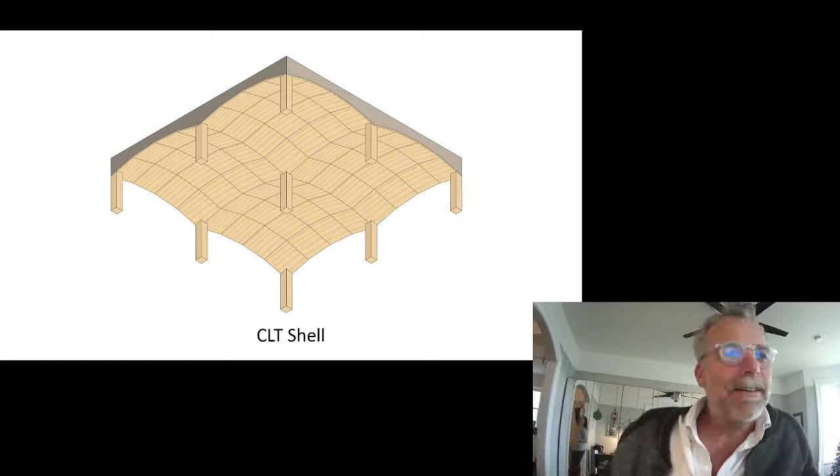One of the benefits of building in mass timber is the ability for mass custom fabrication, because these things are built on 6-axis milling machines. They're very tight, like 1/10 of a millimeter tolerance.

So one thing we looked at doing is a CLT shell. This is a lost form system. We're just using the CLT to generate a shell, which then allows concrete to be optimized in its thickness. So we minimize the concrete by giving it an optimal kind of arching form underneath using CLT.

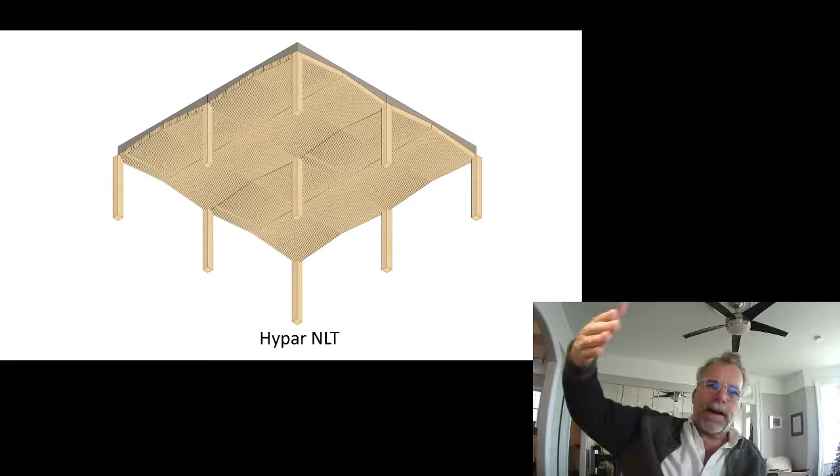Do the same thing with NLT. One of the things about NLT is you can create any ruled surface with NLT or DLT. So depending on how you set up your boundary conditions, you can create a vault or you can create a hyperbolic paraboloid simply by orienting your boundaries at an angle relative to each other. You automatically create a hyperbolic paraboloid.

A hyperbolic paraboloid, if that is what is describing the bottom of your slab, optimizes the shape of the slab, so again we can minimize concrete. In this particular case, it's a leave-in form system. We're not getting a structural benefit other than form creation, but we can incorporate our acoustic mitigation into our NLT. We can mill the boards, incorporate an acoustic barrier, so we do get that benefit as well.

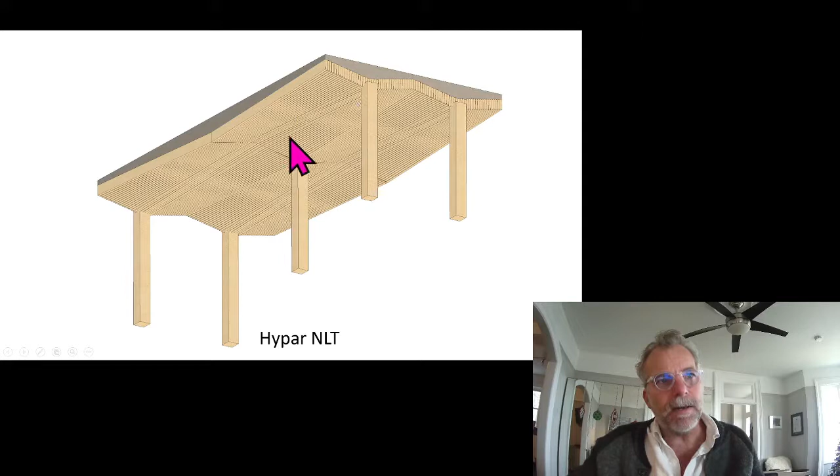Here's a hypar NLT, where we're actually taking the panels full span, and because of that, we can make them composite. You can see that we have a line of columns here, and a line of columns here, and our NLT is continuous from column line to column line, so we can make it composite. In this particular system, it means that the columns have to stagger from one bay to the other. You can see that this column doesn't line up with that column, it lines up with the midpoint between those two columns.

So God knows, maybe this is an idea for a pavilion and not a building, but it's interesting regardless.

This is, I thought I'd share the impact of fire, because fire will determine the most economical system. With concrete, we design it in concrete, we add a little bit of cover, we get a fire rating, and we're done. With steel, we design it in steel, we protect it for fire, we're done. With wood, we'll design it one way, then add the dimension or optimize the system when we add the additional timber we need to resist fire. The system we chose to begin with is no longer the optimal system.

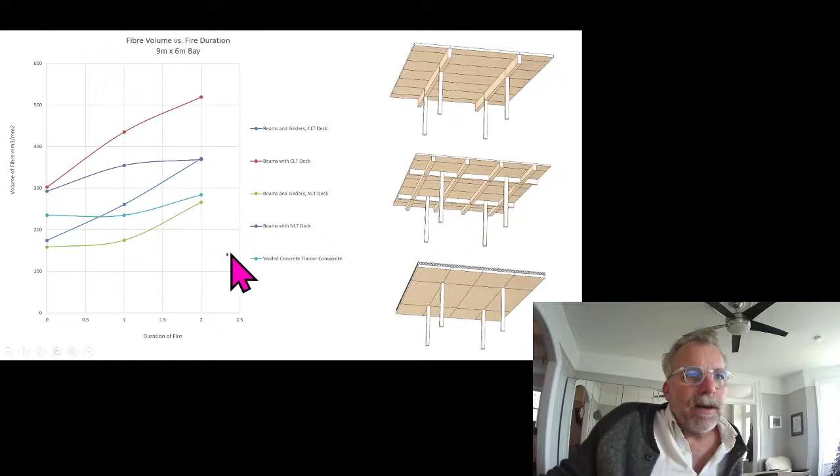So what we can see here, let's just look at two of them. You can study that, I have no doubt you're going to study this diagram on your own. Beams and girders with CLT deck is almost the optimal system from a volume of wood fiber point of view in the absence of a fire. After 2 hours, though, the voided concrete timber composite is dramatically better from a volume of fiber point of view. So if we design the same system for a 2-hour rating, optimize both systems for a 2-hour rating, after 2 hours this one is less wood fiber, whereas at 0 hours this one is less wood fiber.

Now remember that I said fiber volume dominates the cost of timber systems, and that the premium on a timber system is roughly 15%. If we can take 15 or 20% of the fiber volume out simply by using an asymmetric bay, we can recover the premium of using mass timber.

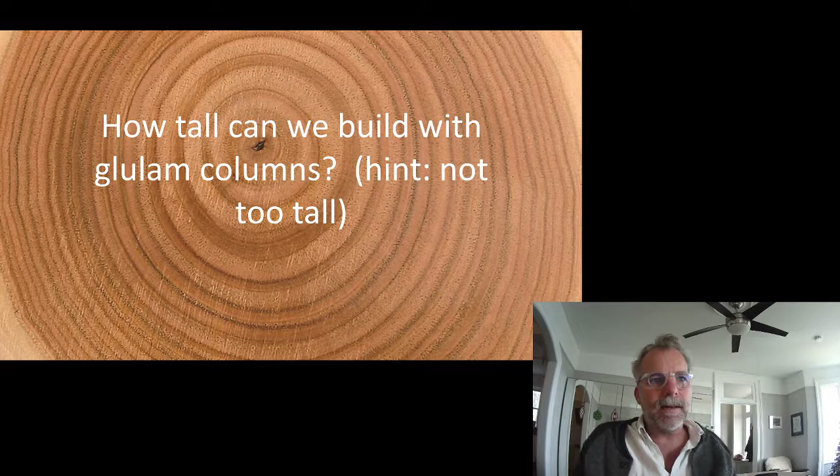My point was going to be that we want to start building tall. Columns start becoming the driver. We're doing an 8-story lab building right now, and these are the kind of solutions we're looking at for columns. The columns wind up getting very big and using up an awful lot of real estate, so we're very often into strengthening columns by putting steel cores in them, either wide flange or hollow steel.

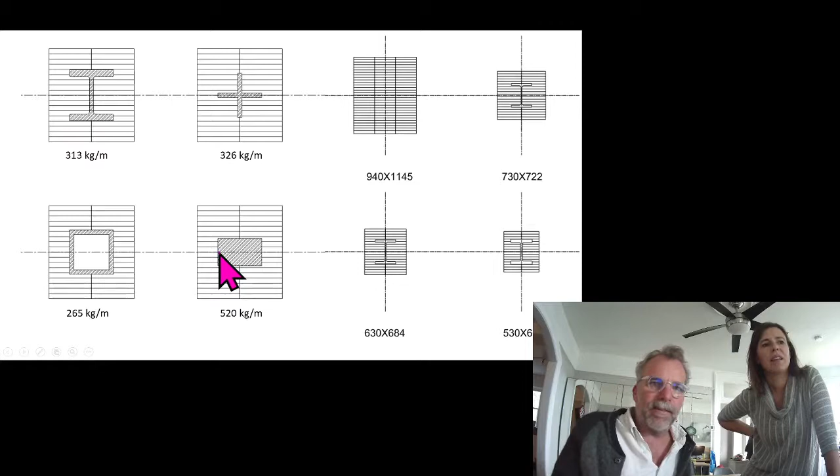Did you look at the slide already that said how tall can we build with glulam columns? Yeah, hint, not too tall. That is not the same as how tall can we build with wood, because that is, as of yet, unlimited.

That's right, because there is very much a question like that. I realized I didn't know this slide was in here. This appeared on me, and it makes it sound like my question was a trick question.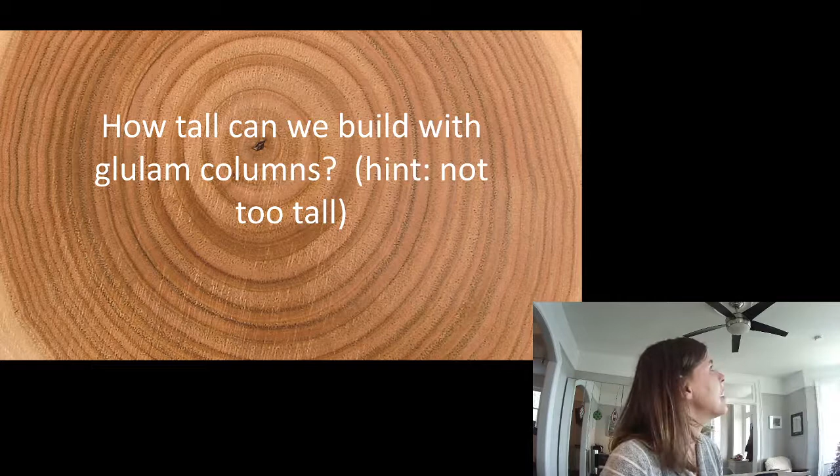It is not. It's unlimited as long as you apply alternate methods for design. The columns we need to work on, but that doesn't mean we can't build tall with wood. It's not cheating to reinforce your column with steel any more than it's cheating to reinforce a concrete column with rebar. Exactly, it's the same thing, and a flitch beam is still a wood beam with steel embedded in it. Thank you, Shannon. Thank you, Dave.

So I've been doing chores and Christmas decorating. I didn't expect to be doing any of his timber lectures, so I haven't even looked at these slides, so I don't know what's coming up. We'll wing it. Like I said, they're mostly Blackwell projects, and as much as I dabble in Blackwell projects periodically, I haven't been there in a long time.

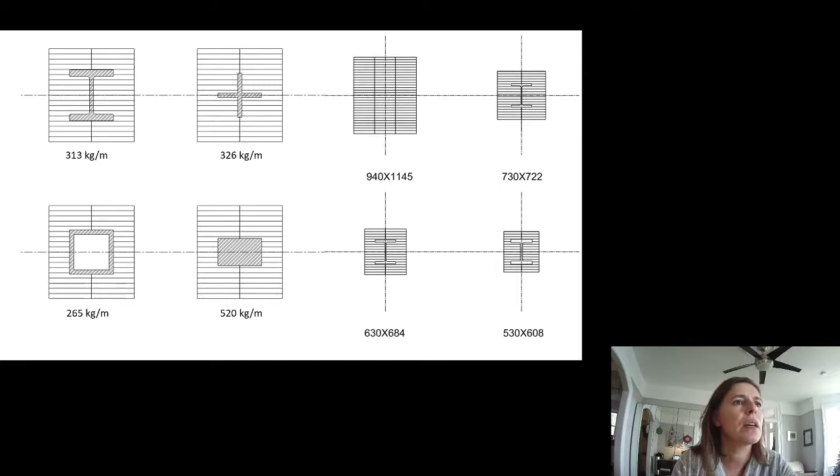So let's go on to the next slide. And then how do you connect these things? Because we're connecting large things, maybe we're doing unique things. So this is a way that helps, I'm assuming, deal with the connection. This eliminates the need to try to connect multiple beams coming into a column with a floor plate on top of it. Wood is excellent in bearing.

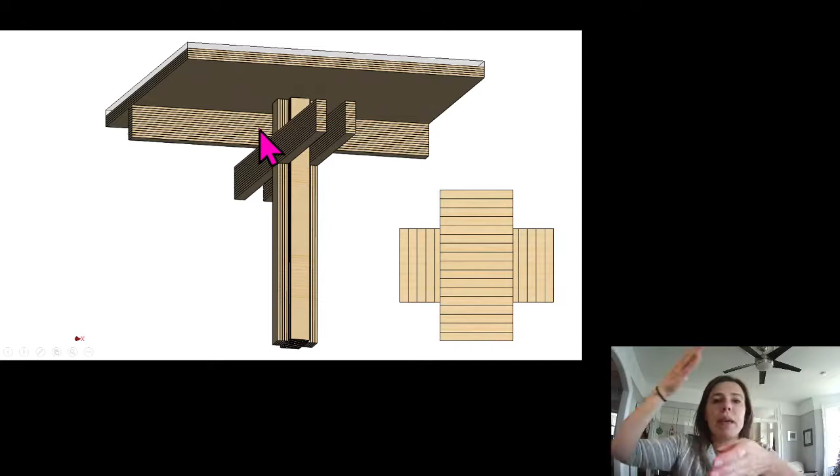We like to bear things with wood. So this allows us, rather than try to connect in shear at the end grain, we're connecting along the side to this column and then supporting this beam in bearing on top. In fact, Dave and I build our decks this way rather than try to have one layer of framing with deck boards on top.

Dave and I do a 4x4 grid at 5 feet on center, and then we do a 4x4 grid at 2.5 feet on center, and then we do 2x6 deck material on top of that. So stacking them as we go up. Our actual deck roof is built in this style too, where we laminated our beams on the side, and then did laminated beams on the top. It's interesting that if they're doing this, they didn't laminate on both sides. I'm not quite sure what the goal is there.

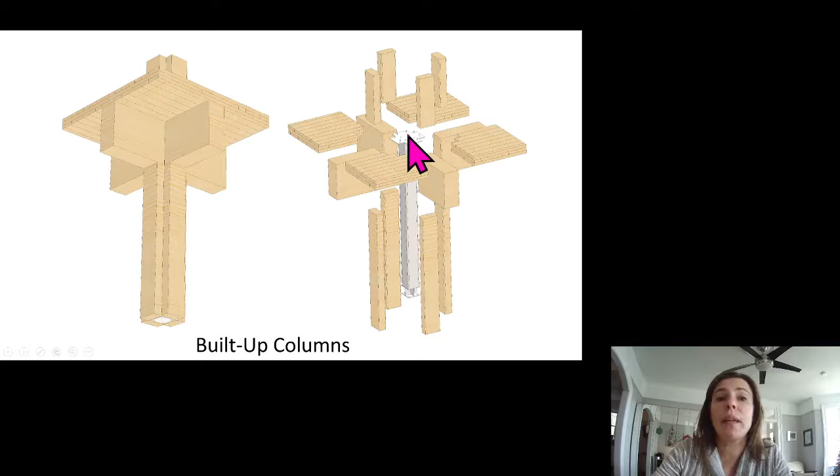So here's where we get into the difficulties with built-up columns. We're trying to connect, we need the load to actually make it to the steel. If you just connect it to the wood on the side, how does that load actually get into the steel element? Because as much as the deck passes over the column, it's not the one carrying the majority of the load. The majority of the load is actually the beams. So we've got to actually get that load into the column somehow.

How do we manage load transfer, ductility, fire, and shrinkage all at once? I have no friggin' clue. So let's look at the slides and maybe I can infer it. Okay, so we have a few things happening here. This is embedded, slotted into it. So we're dealing with our load transferring into the column and bearing. That's a great way to get load into a column.

We have a hidden knife plate connection here. Steel is crap in fire, and if that is the thing that's getting all of our load into our wood, and we don't want to have to fire protect things, we don't want to have to come in and drywall around this connection for any of the bits that might be exposed, we're actually, I'm assuming, using the wood as the fire protection for the steel, the same way we would concrete around steel, which is exactly what we do for reinforcing in concrete. I've never seen this slide before. So this, we slot this in here, we dowel through, so again, we're using the wood as the protector.

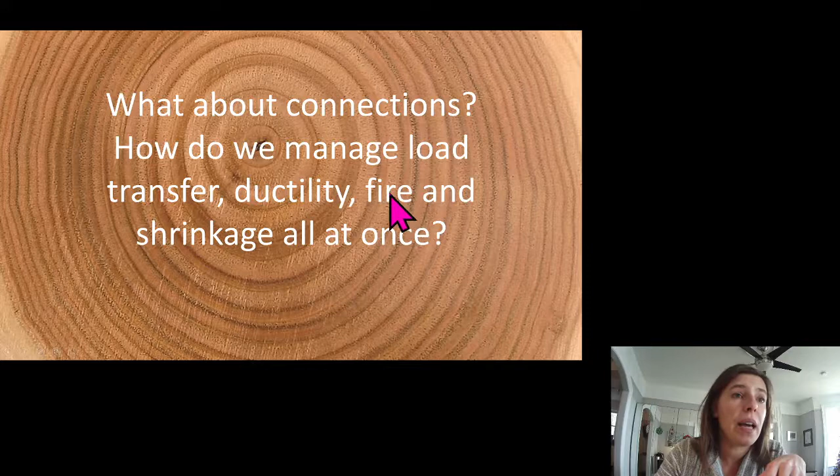So what things did he say he was trying to solve? Load transfer in bearing, fire protection by the fact that it's protected by the wood, and shrinkage - it looks like the steel does all the transferring of the load, so we don't have a wood-to-wood interface. Even if the wood shrinks, we've got dowels here, so there's continued small adjustments. If there's shrinkage in this direction, the steel just moves with it and takes the rest along for the ride.

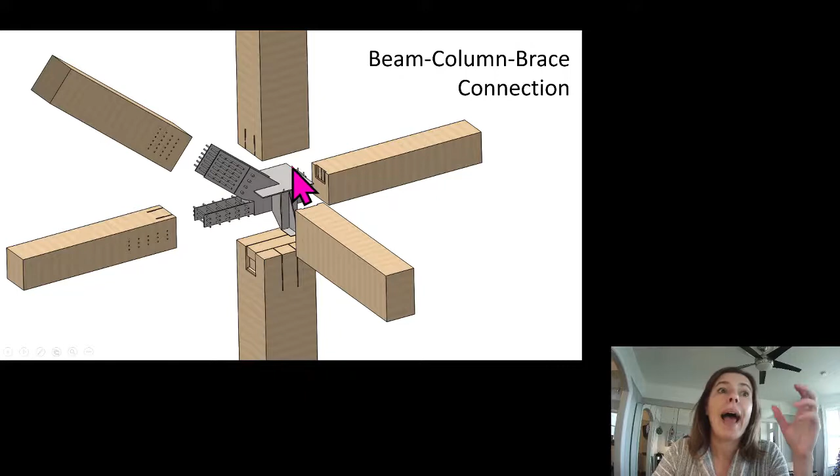The last one is ductility. Ductility is what we like to use for seismic design, and this connection being a steel connection, I'm assuming they've treated this like a ductile hinge - a place that, as much as the wood is brittle, we use the steel for all the ductility. The difficulty with using ductility as a seismic capacity mechanism is that you're actually designing an upper and lower bound. You don't design it to be too stiff - if it's too stiff, it won't yield and you don't get the benefit of the ductility. So this is highly fine-tuned so that at the seismic load, it becomes ductile and actually yields. We want yielding to happen because as it yields, it allows the building to move, which absorbs energy and reduces the seismic loads applied to the building.

So it's a highly fine-tuned process just for ductile connections, and then we're adding in fire protection, shrinkage, and load transfer in a bearing condition. These steel connections become a very refined approach in the design - yeah, we have some of that in steel, but a lot of the time we just hide it and it goes away. The ductility problem is real, but not that much here in Toronto. Steel has the added benefit that the entire building is ductile. In a wood building, it becomes slightly more considered because this is the only place where we can get our ductility.

Column beam girder connection detail. This is slotted over the top so that we have a bearing connection on this column. Both of these beams and girders come in on the side that have a bearing plate for bearing, with bolts fitted into it to deal with the eccentricity and the load.

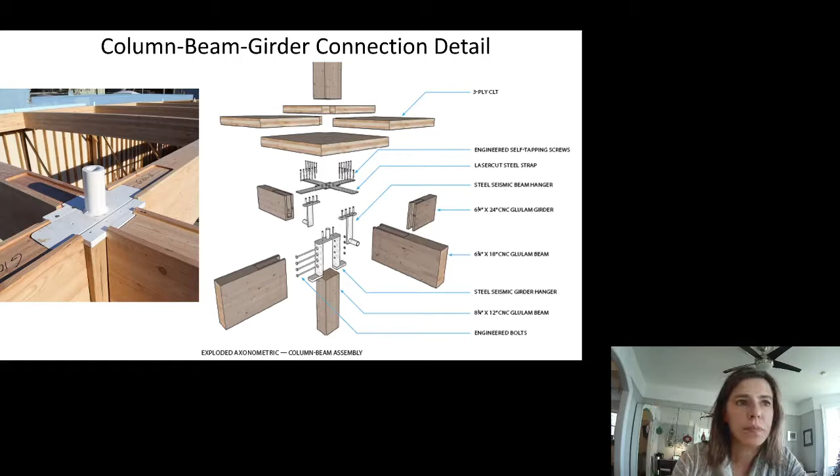Here the steel, they actually kept the column off of the wood and off the CLT panel, so there was some ability for tolerance there as well.

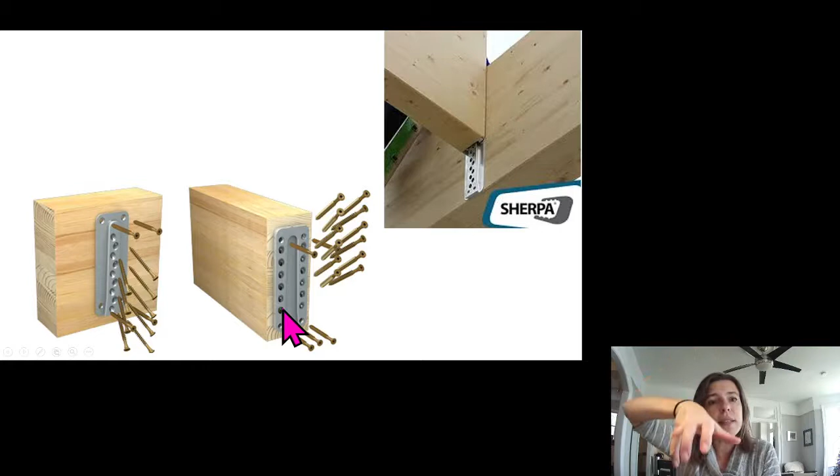Glulam column - so earthquake wasn't as difficult for this one, I'm assuming, or maybe it was - yeah, Brock Commons. So it depends on what their ductile factors were for this. These screws have been kind of revolutionary. I've not seen these connectors before, but that looks fantastic because it changes the angles of them. This would help you template exactly where your screws need to be, which is actually kind of brilliant. You've got a connector on each side, and then the wood slots down onto it - so you screw into each end, and then you slot on, and you've got a lovely hidden connection.

So, show us some sweet mass timber projects. Okay.

80 Atlantic, Quadrangle and RJC, Read Jones Christoffersen Engineering. So a 4-story, 1, 2, 3, 4, 5-story CLT project.

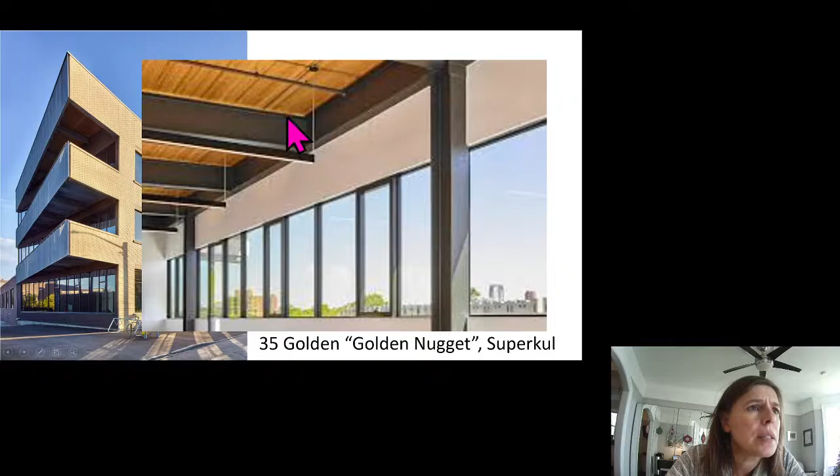35 Golden, or the Golden Nugget Building, mass timber construction. Here's a rendering of the inside. This one I thought was a Pico system, but maybe not. Again, I don't know all of these projects.

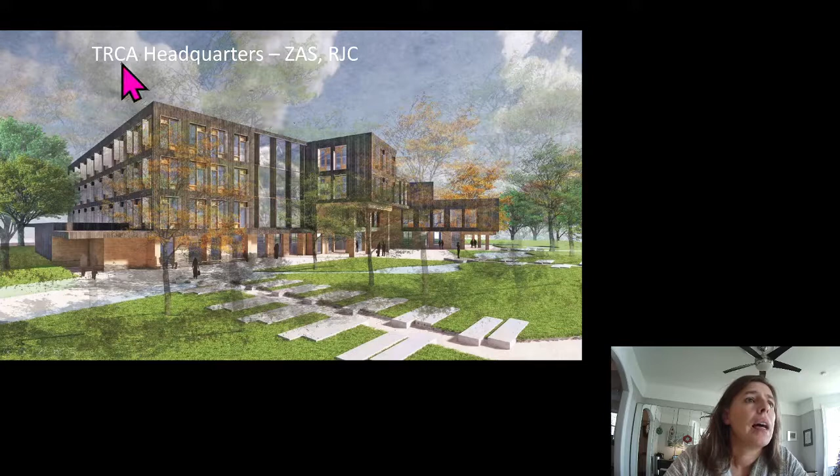So this was the alternate submittal by ZAS and RJC. I think Blackwell won that. I think that was DTH that won that one, I can't remember. 77 Wade Avenue, mass timber project.

This one I can speak about a little bit. This is the academic tower with Patkau, MJMA and Blackwell. This is the one I had originally designed the foundation for in 2012, with Mike Vindell, a principal at Blackwell. We were both associates at the time, and designed a foundation for an unanticipated, unconceived tower. We had to make up our own tower because there was no fee to design one, but they wanted to build the foundations at the same time as the high performance sports foundations. So they built all the foundations at once, and we had engineered a 16-story tower, but had to anticipate where braced frames were going to be, everything. We explained it would limit the future iterations of this project, and U of T was happy with that.

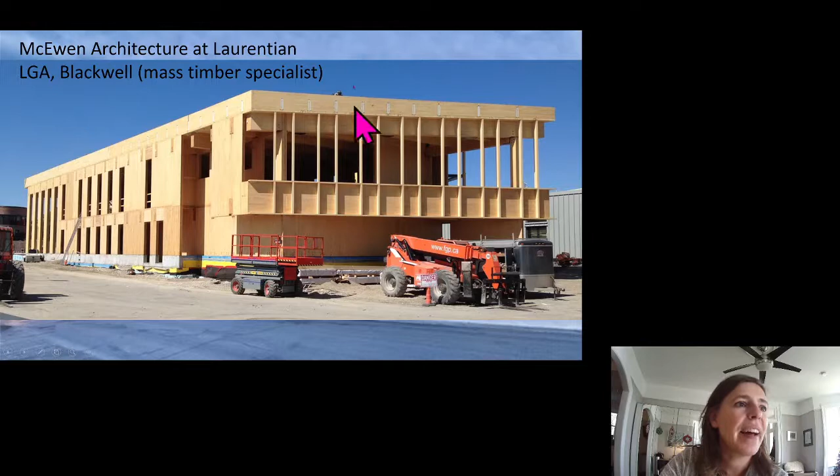And a tower in Norway - all kinds of wood projects kind of coming up. Dave and I joke that Blackwell right now has 6 projects in the works that, if built right now, would be the tallest mass timber buildings in the world. But almost every firm that's a wood specialist could probably make that claim right now.

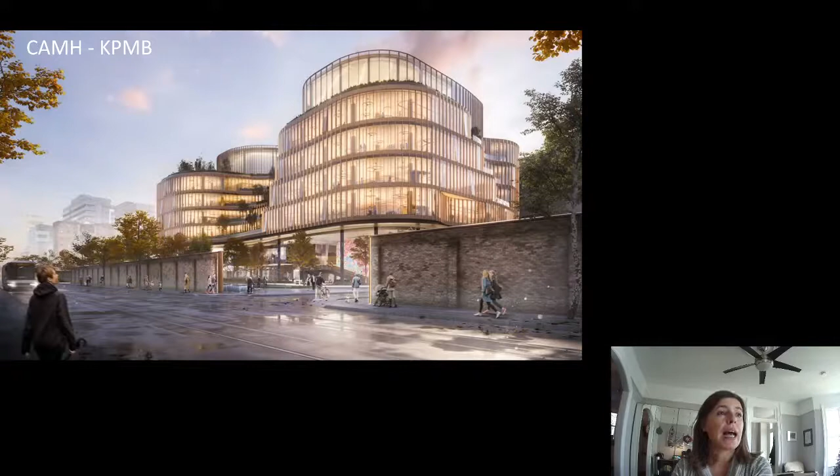CAMH with KPMB, this is a project that's on the books. My understanding is that it's supposed to go ahead at some point. This one also uses the Infina system with the bubbles in the concrete on top of a wood platform, kind of maximizing the benefits out of both materials, making both do more than they could have done independently.

So I apologize for that disappointing finish on my part. I feel like Dave could have really sold that maybe a bit more than I could. But I'm glad I got to participate in it just a little bit.